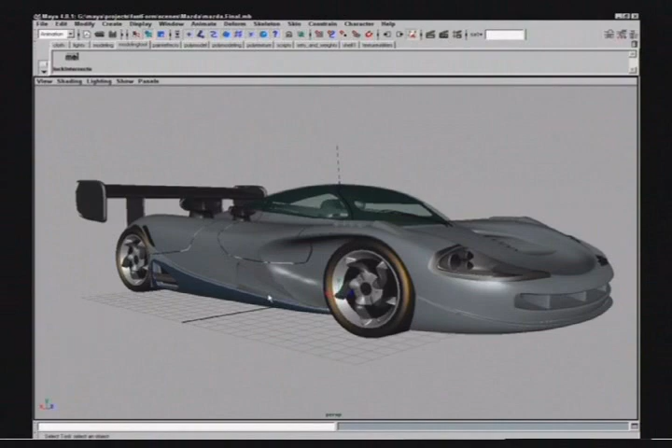In this modeling video, we're going to cover the steps to model this particular car, using a lot of things like bi-rails, freeform fillets, some lofting, a few of the circular fillet types, as well as some of the planar tools.

Building on what we've covered in the previous videos in the 1 and 2 section, we're moving a little further into adding more detail, dealing with more organic and refined shapes and surfaces, such as this hard shell surface on the car.

We're going to break down the different steps, taking each component in a separate section and talking about how each one was created, dealing with all the issues of trying to blend together different forms.

This includes getting the fillets that integrate second levels of detail, such as fenders, bumpers, and this little raised section, trimmed out areas, a lot of trim and duplicate, and even using a lot of the offset type tools, as well as extrude. So a little bit of everything.

The first thing we'll start with is building the main body form, which essentially uses the bi-rail tool, then mirrors one copy to the other side, and then deals with trimming out the various components to add on some of the secondary detail.

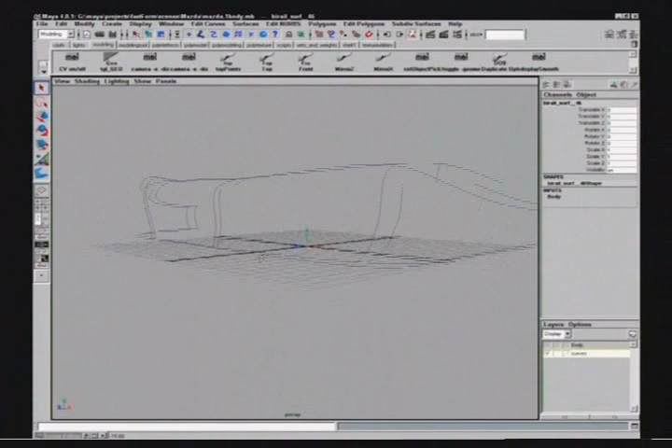We used the 3 plus version, meaning we have multiple cross-section curves being used to generate along these two rails. So this curve, the second, third, fourth, and even fifth curve are all part of your cross-section or construction curves, and then we have two rails, one at the top and one at the bottom. Bi-rail is kind of like a sweep or a loft, but it follows the two rails of control to keep the cross-sections together.

One thing you need to be aware of when using bi-rail is that curves always have to connect. Anytime I'm trying to create a rail, I need to have one curve touching onto the rail at both the top and bottom section. You always have to make sure that works, otherwise bi-rail will fail.

The first thing I'm going to do is set up how I would go about creating these curves, and then we can use this template of pre-built curves as a model to stage the next part, where we add the top section. I'm going to hide this for a second and talk about how I'd actually develop these curves. First I'd go into a top view and develop what I want the top profile to look like, or the elevation of what that curve shape would do from front to back.

So I'm going into my Create CV Curve Tool menu, making sure I'm on the 3-degree or cubic curve setting. I'm going to start drawing curves that basically go from the center line out and then back to the center line. For this, I want to use grid snap so I can get the first point sitting right on top of the grid, using this as my mirroring axis in the top view across the Z from top to bottom.

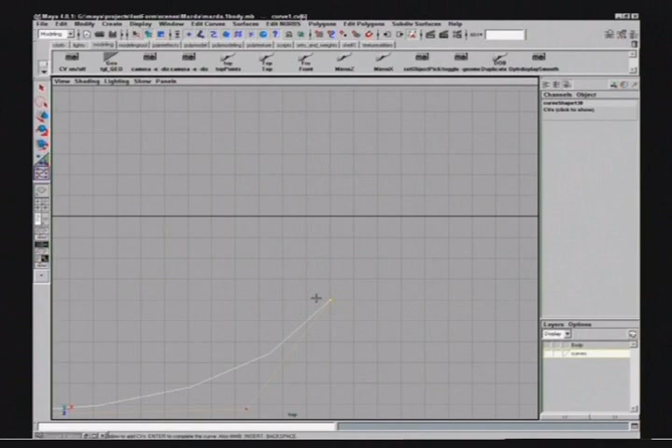When I get to the end here, I want to also use grid snap or some means to make sure those last 2 points are lined up. So I'm going to grid snap this one and put another one right there. Now I have those 2 last points, and then we can go in and shape the model a little bit, being aware that these last 2 points should stay in a row.

So if I want to pull a little more tension here, I'm going to pull this CV back a little bit, pull the one up here in the front a little bit more, and then we have 2 in the middle that can basically sit right there, kind of even along that horizon line. So in perspective, we have 1 curve.

Now when I'm talking about a bi-rail, we need to have at least 2 curves that exist as your rails. So in a very simple case, what I'm going to do is just duplicate this curve and move it up so that I just have a copy.

So I'm using as a hotkey just duplicate with transform, Shift D, and then I'm just moving up a single copy of it. So a quick copy, we don't have to worry about what our duplicate options in the above menu are set up with. Just copy it and move it. Now this can exist as our 2 rails.

The next thing we need is some kind of control curve that's going to go through here. Because bi-rail needs to have the CVs or points connected or snapped at least to those rails, what I'm going to do here is go into my Create Curve menu and select the EP curve, not the CV curve.

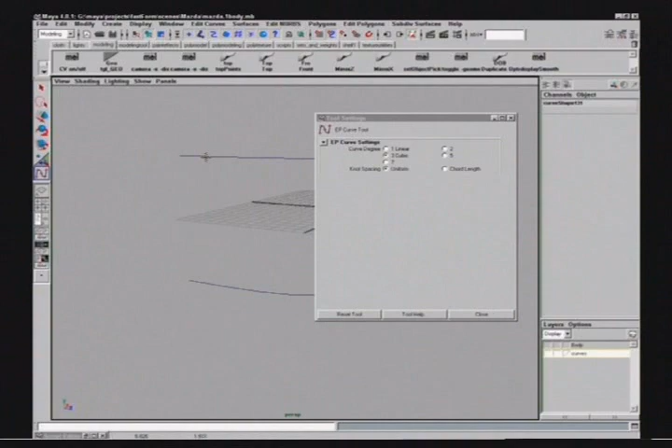So I'm going to use again the cubic or 3-degree curve for edit point curve drawing, but this time I'm just going to curve snap onto that rail at the top and then curve snap the second point right there on the bottom. This will create the entire curve.

Again, you don't need to have 4 points with the EP curve, and it's very easy to get things to snap right on there. So if I hit Y to repeat that last tool, and then curve snap onto the second set of rails, or basically on the back end here, and then hit enter to finalize it.

Okay, so what this gives me now is a complete closure, which will allow me to do one of the bi-rails, meaning I have 2 rails here, meaning bi-rail, and then I also have 2 cross-section lines, or basically curves, going between that surface.

So if we go up to our surface menu and come down to bi-rail, you'll see there's bi-rail 1, 2, and 3. What bi-rail 1 means is you always have 2 rails, but in this case you have 1 generation curve that you're going to sweep across there.

So for bi-rail 1, you need to have a minimum of 3 curves, meaning that I could use this as my cross-section, and then that as my rail, and that as my rail, and get a surface generated from this. I'm not utilizing the last curve right now.

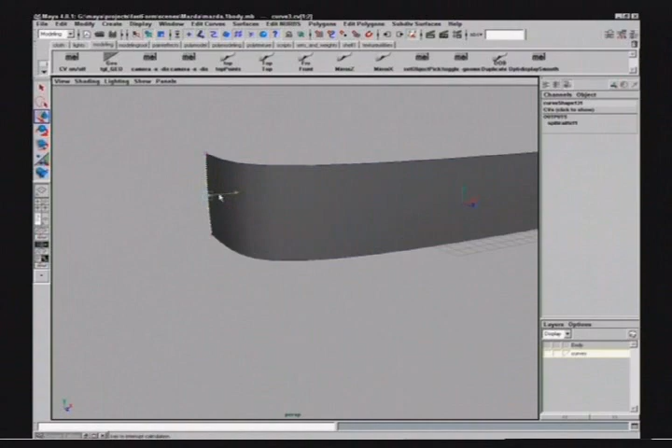With history, you can go in and change stuff as long as you keep the idea that those curves need to stay together. So let's move this one cross-section out a little bit, and you can see that sweeps that cross-section through those rails completely from front to back. Notice that this other curve, the back here, isn't being used right now, because this is just a bi-rail 1 generation curve.

Now also with history, you can go in and select the midsection. So if I want to push this part up or down and readjust how I want the profile to look, or the side view of that, pushing this rail up or moving it in, I can have that sweep still historically update through the various cross sections here.

Now this bi-rail 1 is just going to be limited by only having that one cross section curve. So if we remove the surface and try to get a bi-rail 2, that means I can take the second generation curve here and manipulate its control points. So we're going to pull these in this time, so I have an out concave to a convex situation right here.

And I'm going to go in and select the bi-rail 2 tool this time, which will allow us to again select and create a swept surface, but we need to have 4 curves total. So your 2 rails and your 2 cross-section curves.

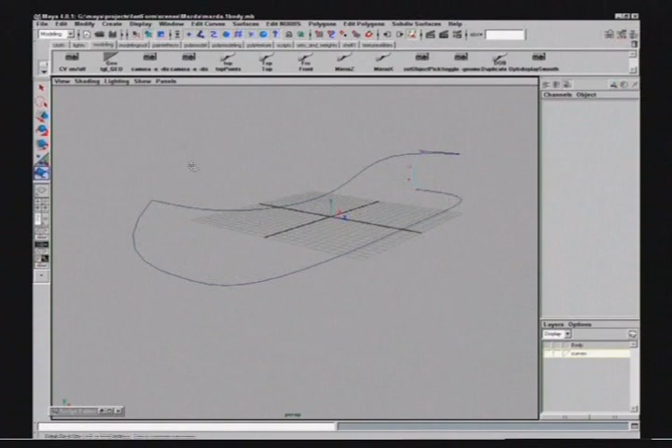Now when you're using this one, it's a little bit trickier as far as picking order really needs to be looked at. When you're using bi-rail, it is one of those command settings that is a tool, meaning usually you need to select the command first and then go out and pick the curves. In previous commands like loft, you may go and pick all your curves first and then say loft.

Here it gives us this separate pointer type, this little arrowhead, and if you read the prompt at the very bottom where the help line is, it says select 2 profile curves. So I'm going to select this as a profile and this as a profile, and now it says to select 2 rail curves. So this rail and then that rail, and again you're going to get your sweep through the bi-rail, this time looking at both curves.

Now if we flip this around, you can see that now it's utilizing the look of that one as well as the characteristics of that first one.

Now if we look at the attribute editor for bi-rail, it will show at the top the input curves - what is your profile 1 and 2, what is your rails, and then the transform mode, which says proportional, which you can also switch to non-proportional. Now the difference between proportional and non is how it's going to actually scale up or down your input profile curves, and how they're going to deal with changes in your rail distance.

So let's look at that for a second. If I take one of my rails here and start extending some of these CVs up, I'm creating a situation where it's much thinner here and much thicker over there. What is that bi-rail going to do at this point when it deals with the cross sections at the midsection of that body between the 2 rails?

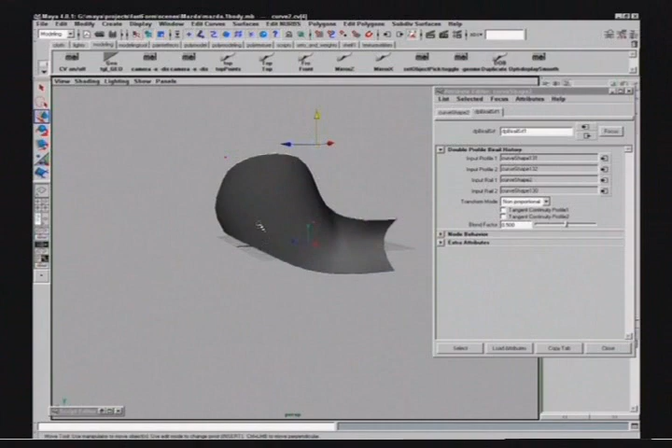Well, if we look at our bi-rail setting, non-proportional is going to scale that curve and actually kind of stretch it through this area so that it is scaling non-proportionally, or maybe more in the Y direction in this case, than it is scaling in the other 2 directions of the curve, or say the Z direction.

So when you flip this to proportional, you will get a slight change here, as it is still scaling that curve up, but it will just pop between a little bit more non-proportional linear scale this way versus trying to scale the entire curve and keep a little more of the curvature in here. Whereas normally if we took this curve and scaled it up, it would tend to look flatter as that arc got flatter over a distance of scale.

So that is one of the things that you can change in BiRail, and particularly in BiRail 2, that is going to be a valid transform mode change that you can make here.

The other thing you're going to see, especially in BiRail 2, is something called a blend factor. Blend factor allows you to modify which curve in your two-curve bi-rail, front and back, has the most influence. Right now it's at 0.5, meaning somewhere about in the middle of our rail, it's utilizing a kind of morph between the front and the back and getting something in between those two.

If this one is a little more convex and this is a little more concave, by the time you get to the middle, that profile is almost going to be a straight line. So you can influence the blend factor.

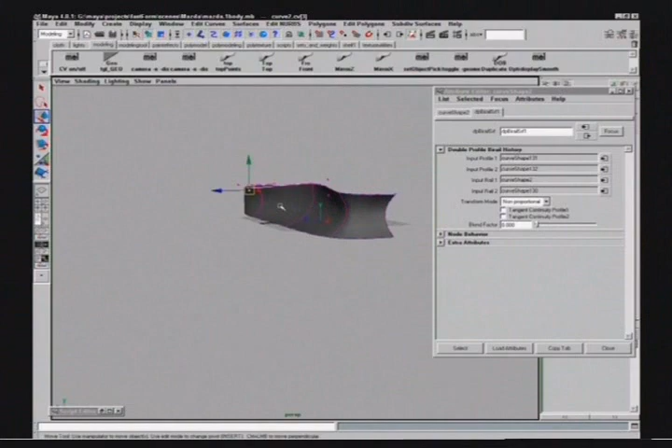You'll see that when I move this to 0, it's using essentially the first curve, which has most influence all the way through. So this stays a little more concave all the way through that profile as we look down here. If I move the blend the other way, then it starts to utilize that front curve, carrying this convex or pushing-out kind of profile further down the body. So even back down here, we can see that that is curving out more, and then eventually it's going to hit the way your curve looks at the end again.

So that is a BiRail 2 situation. Now, one of the things with BiRail 2 that makes it a little more unique is that you really have four curves, and any of those four curves can be your rails. Say these two could be the rails, and these two can be your profiles.

Because this is a sweeping type tool, you're either sweeping this curve, transforming through that curve along this rail, or it's taking this curve and transforming through here. So in effect, you can get two different results from BiRail depending on the order you pick.

So if we do the one we did last time, front and back, then rail and rail, it'll hit, and we just kind of move that to the side here. Then do BiRail again by hitting Y to repeat that tool, and we're going to take this as a profile, and that as a profile. This is our rail, and the back curve is our rail.

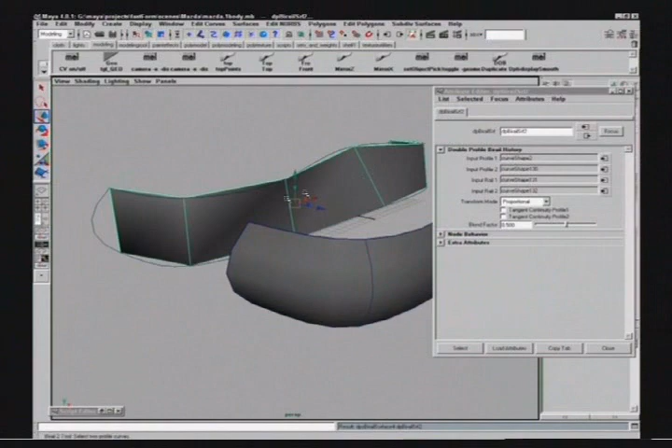With these two surfaces, there will be slight changes. If you push them over each other, you're going to see that they actually don't match up perfectly. There is a point where this is kind of popping through, and these are not exactly the same surfaces, because the sweeping operation will create differences depending on direction.

So this one looks like it's a lot flatter in its profile, and this one looks like it's a little bit better where it's curving and taking into consideration these shorter curves here. So that's typically the way I would do it—take the shorter curve and make that my generation curve.

Now, going back to BiRail 1, when we select this as, say, generation, path, and path, and we get our curve here, notice that you don't have the blend tool in your attribute editor—there's no blend slider. You can still use proportional and non-proportional, which will factor how that generation curve changes through the wider span between the rails, but you can't use the blend control between front and back.

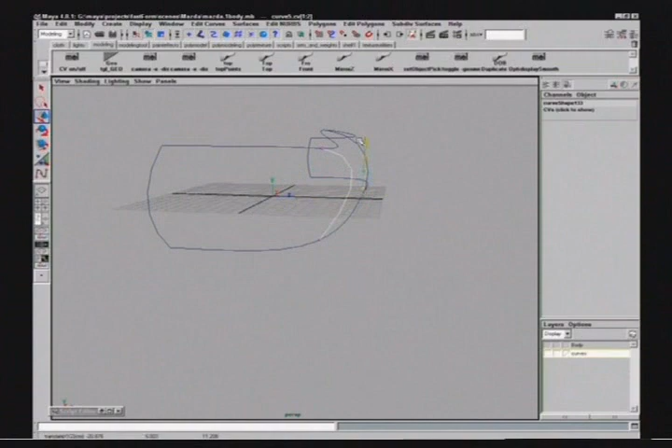Now the next thing is BiRail 3, which would be something where you go in and take multiple generation curves. So if I curve-snap another control in the middle of this, then hit Y to repeat the last command, and C to snap a point here and a point here, now we have the idea where we have more than two generation curves. We could take this one and move it out as well, and take this other rail section and also move it out and push it up.

Okay, so now I have more rails, basically four generation curves here. With this, if you go back into your BiRail tools, you'll see BiRail 3+. This, in terms of options, isn't going to give you blend control, and it will still use the proportional or non-proportional setup. But beyond that, you need to actually specify when you're done picking profiles, because it doesn't have a predetermined amount of profiles.

It's 3+, meaning 3 or more, and then infinitely as far as the number of cross-section curves that you could actually have there.

So what I'm going to do here is go in and start selecting my profiles, 1, 2, 3, and then 4. Then it needs to know when I'm done to start selecting the rails. So I hit enter, and then look for the prompt at the bottom that says select 2 rail curves. So I go 1 and 2, and then we'll get to our BiRail 3+.

Now in a tool like this, you have to watch out a little more, because it can give you more cross sections through the middle of it as it's trying to adapt to the changes in your rails. Depending on the severity between each one of these original construction curves, it can influence the number of points that rail is going to need to design the cross sections. Rails will also have to throw in a lot of extra isoparms to facilitate the weird breaks that happen in the middle of your surface.

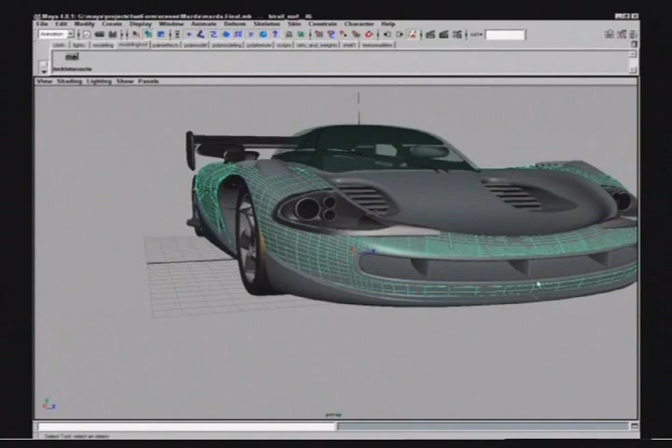So when I'm designing something like this cross-section in the model, I may start out just using a front curve and a back curve, and then do point pushing and pulling to get the rest of this body shape in here. Looking down, I might decide I need a more biased curvature up here, and then towards the bottom maybe this goes a little bit flatter. So depending on how you want to control it, BiRail 2 is a good one, or you can go all the way up and start generating multiple cross-section curves.

Now, for the sake of the model here, to get the same control of what I had in the last body that you just saw, I went and generated 5 BiRail curves. Each one of these is changing to adapt to the various cross sections that I need to have at that particular zone. So this has a much more raised and kind of flattened top section, and then curves down. This one right here is a little bit flatter on the side, and then that's a little more rounded, and so on.

And then this has a much larger back sweep into that section right there. So when I'm BiRailing something like this, I'm going to use the BiRail 3 for this particular one, and then we'll go through and make all the cross sections.

Now, another way you can work with BiRail is to do things in sections and then go in and attach them together, because BiRail does have some tangent history or tangent control between separate objects. So let's try that one as an example.

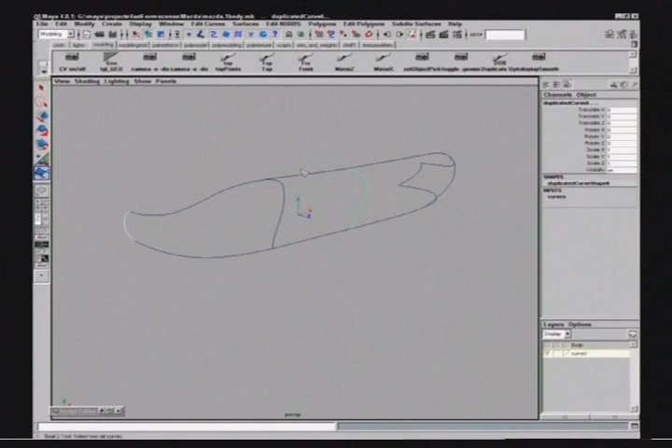We're going to go into a BiRail 2. First thing I'm going to do is select that cross section, and then let's just use this midsection, and go in and finalize this as the top. Even though this is a much larger or longer curve, it's going to stop right here, and then use the bottom section. So BiRail doesn't have to be an endpoint curve or stop right there.

You can use a partial BiRail, basically using a partial rail for that cross section. Okay, so I have this part developed. Notice that I maybe need to pull that out by pushing on CVs, or even do something like a BiRail 3 here. Now for the back half, we could do the same thing, where that'll be a cross section, and then up at the front, when I already have an existing surface, I want to go in here.

BiRail is going to automatically pick the isoparm of the existing surface and use that as its reference edge, not the curve that was there. So it's actually automatically picking the isoparm. And then we pick on that rail, and then the rail here, and then we get basically the completion of that other half.

Now this object is not going to be tangent or seamless yet. If you render it out or throw some shaders on here, you can see that the isoparms aren't lining up, and that they're kind of coming off at an angle here.

So one of the controls with BiRail, particularly BiRail 2, if you go to the attributes for it, you have 2 checkboxes called Tangent Continuity Profile 1 and Profile 2. So this can make the new surface, or basically the second surface, tangent to the first one.

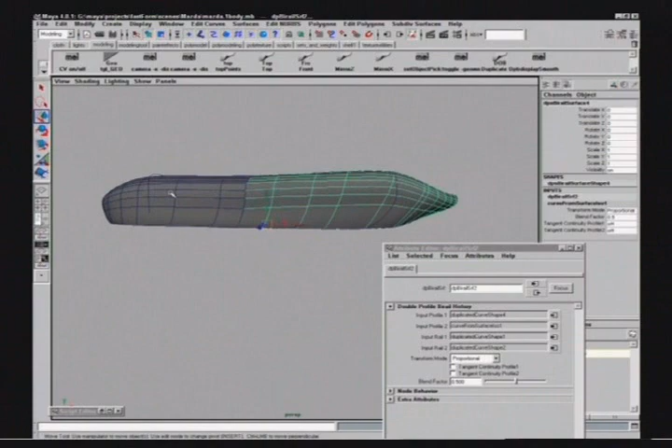Where it says Tangent Continuity Profile 1, if I click on that, I'm telling the first profile curve to be tangent to some other surface. But there isn't one here, so it's not going to do anything other than give you an error.

Whereas tangent on number 2, if we bring that up and click on tangent 2, it's going to go in and do a fine-tuned adjustment to this. If I click this off and then back on again, you'll see a real subtle change in the mesh. The closer these two surfaces are already, the less likely you'll notice a big tangent change here.

We may notice it a little more as I start adding some severity to the blend factor. But other than that, you're going to get the same kind of butting up of these two surfaces, and they're going to look similar.

Now, I may do this just to control sections, and I may not worry so much about the tangent continuity between these two halves, because as a third step, I'll go in and actually attach those two surfaces.

In that case, we grab something like an isoparm of that edge, right click, grab the isoparm of the other edge, marking that area, then go into Edit NURBS and say Attach Surface. We're using Attach with the blend method, and I may turn off knot insertion so it doesn't add extra points inside there. That will give you a definite smooth cross-section blending between this particular bi-rail.

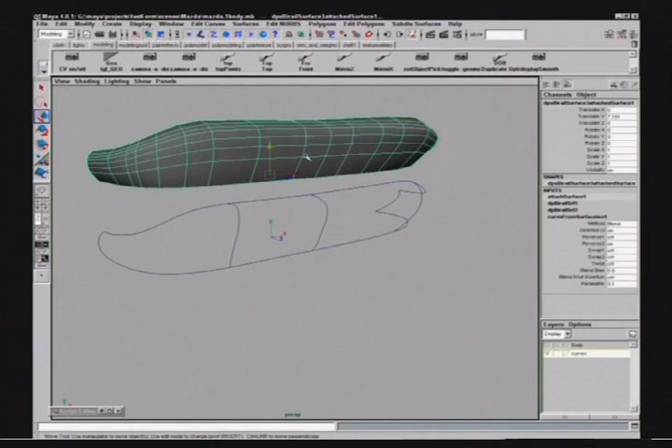So that can give us our cross-section. Now the next thing we want to look at, opening up another scene here, is once I have that section created—here I've gone in and fine-tuned it a little more, sometimes pushing and pulling on a few CVs to stretch and add tension where I want it, but essentially I'm just working off that original bi-rail.

Now I'm going to need to create this top section here, which on our other model is this piece, the top piece that is just blending between two halves, or the two copies here.

Now this is going to be a little bit of a cheat, but it does work to get the top to look fairly smooth or integrated between them. I'm going to do something similar to a loft, but it's actually going to be a freeform fillet that joins the two halves here.

So the first thing I'll need to do is mirror copy this to the other side. I'll make sure my pivot point is sitting over here at 0, which it is not, so let's turn on our grid, hit insert, snap my pivot back to center, hit insert again, then duplicate using the negative scale of Z. So X, Y, Z, go to that third column, third row where it says scale, make that a -1, then hit apply. This gives us a closed off surface.

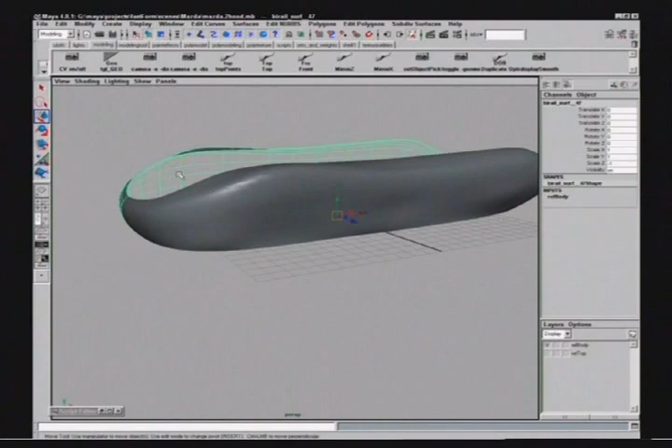One thing you'll notice in my display throughout here, something I changed earlier in my model, is I turned off double-sidedness in the renderer so I don't have to deal with the confusion of looking through the backside of the model. This also acts as a rendering optimization so when you are rendering your scene, it doesn't have to render both sides.

You can go into shading and turn on wireframe on shading to see both sides, but if you want to make it double-sided or single-sided for rendering, go to the attribute editor with that surface picked, come down to the area called render stats, and turn off double-sided. So right now this is rendering both sides; click it off, and it's only rendering one side.

If it's rendering the wrong side, you can hit opposite, which is right below that double-sided checkbox, or you can go in and actually flip the normal of the surface by going into Edit NURBS, Reverse Surface Direction. That'll flip that one back the other way.

So in either case, we have our two halves. Now what I'm going to do to close off the top and get a smooth blending is take the isoparm of this half and an isoparm of the other half right at the top, and go in and close them off. Now you do not want to use the loft in this case, because the loft is just going to give you a straight line, the shortest distance between these two edges. So you're not going to get a very clean surface there, as far as tangency goes.

Instead, I'm going to go into Edit NURBS, down to the Surface Fillet options, and there you'll see something called a Freeform Fillet. With the Freeform Fillet, this works kind of like the loft, but you can only use two curves. So to make this work, I'm going to grab an isoparm in that half, grab one from the other half, and then go to Edit NURBS, Surface Fillet, Freeform Fillet.

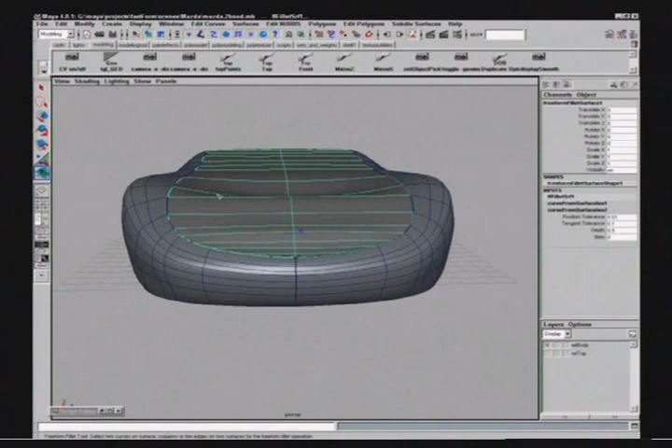That is going to generate a surface that goes in between here, but one of the things you'll notice is it starts dropping down and doing some other curvature changes in an attempt to keep this tangent from the top down. So this will actually check for tangency on both ends.

With Freeform Fillet, you're going to get a few extra isoparms in the middle here. In this case we have one in the middle, and if you right-click and turn on your hulls, you'll see you actually have 5 hulls across here - 1, 2, 3, 4, and 5. Whereas loft, you may end up with just 3 or 4. This mid one is just controlling how the lower dip-down section needs to look, whereas the 2 hulls on the end are trying to line up for tangency to the existing surface. So we do have a couple extra cross sections in here.

Now you can change a few things in this. For example, you can change the depth of the freeform fillet, and you can change its bias a little bit. So if you go to the depth slider and move it, going down to 0 will flatten it out - 0 gives you completely flat. Going up to 1, it starts curving down a little bit more. So what's happening at the bottom is this thing pulls down and tightens up. If we bring this back, it tries to keep those points a little bit closer together.

So what's happening in this case is that second row of hulls, which is controlling your tangency to the edge - by moving this, you're essentially moving these things in and out. I can move it closer to the edge where it stays tangent for a shorter distance, and then drop down. You can also change something called bias - it will switch which side is controlling more of that rail, and you can see the isoparm moving left and right. That's going to throw symmetry off on our model, so I'll keep the bias basically in the middle, at 0.

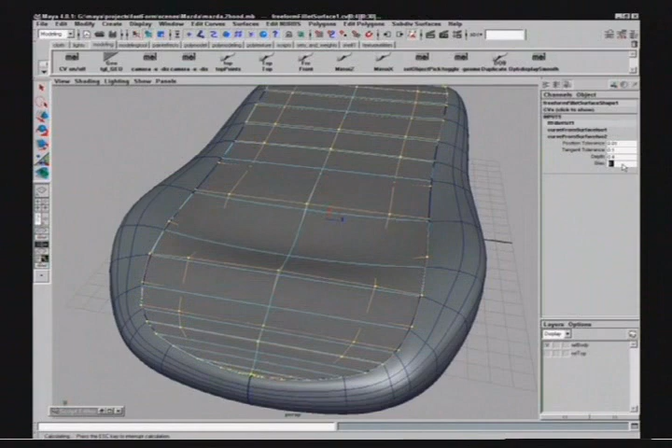But for my model, there's a lot more going on as far as how the tension is being built along the edges here - the way this is curving down a little bit sharper. So what I'm going to do for this is go in and add a few more control points in the middle of this surface. Let's hide the rest of the model temporarily, so go and hide unselected. I'm going to add a few more isoparms in here. Now for this, I don't want to just grab isoparms and drag them from here to here, because I don't know if I'll get them symmetrically inserted.

So instead, I'm going to grab the isoparm at the end of both halves - just highlighting those in yellow. Then go down to Edit NURBS, Insert Isoparm, and change the settings to Between Selection, so that between these 2 selected points we add 2 more rows of isoparms in the middle. If I apply, we get something like that. Or if I want more control, I can turn this up higher - use something like 4 rows of isoparms in between.

Okay, so that is just going to give us a little more control here, meaning that if you look at the hulls now, it's really forced the last 2 hulls on the end to be fairly far apart. And then these 2 hulls are really close to the edge, but there's a much more broader area in between here that you have control over.

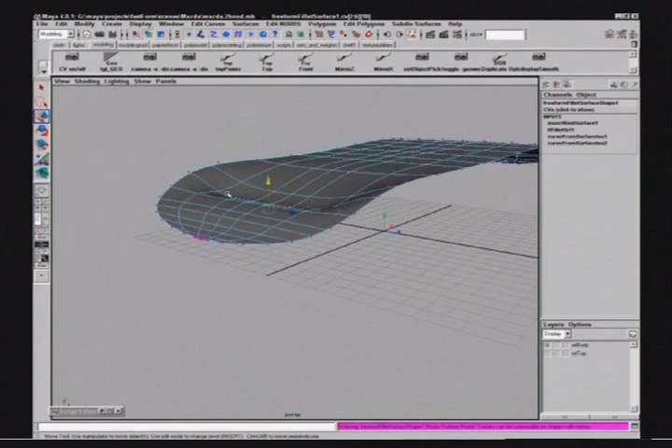Okay, and I'm being very careful not to pick the last 2 rows. So when you're looking at the model, the last 2 rows of CVs right along the edge, or basically those last 2 rows of hulls running along this edge as well, you don't want to alter those, because that's going to break tangency with the rest of the model here.

And you don't want to break the tangency right across this edge, otherwise you're going to notice a sharp seam there. So I'll start moving these down, and then using my arrow keys for pick walking, okay, find the right direction. I'm using up and down here.

You can then move down to, say, pull down that row, and pull down that one, and the one down here, and then continue until I get towards the end, and I'm not going to pull the last couple rows in the end to change the shape too much.

Okay, and then we can continue pulling these down. Say if this is going to recess a little bit, maybe you'll get to an area where this will cross, and that area will actually start to go higher, okay, towards the back. And if we look at the model, it is doing something similar to that, and then dipping back down again on the next section.

Okay, so this will be dropping, dropping, and still more until we get towards the end. So you want to spend some time kind of smoothing these things out, but in the end you're going to have a much smoother section towards the middle as we're kind of designing how that cross section is going to look.

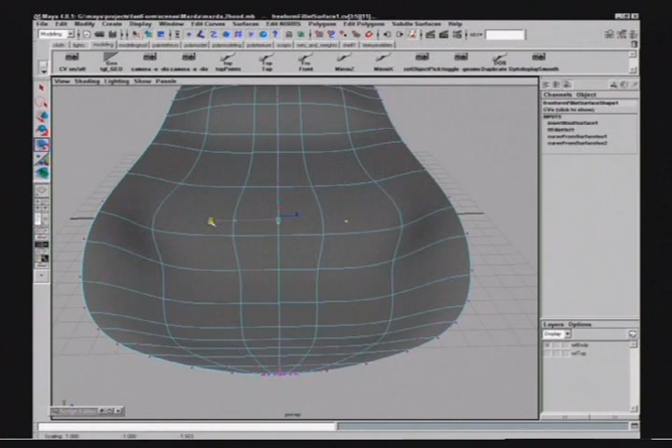And you can see that it's just going to build a little bit of a pocket of tension here. And using the arrow keys to jump to the next row, scale those out, and scale those out in Z, and then continue scaling these out.

So we're getting a much sharper kind of drop here, where that fender is basically going to jump over the top. So let's pull up the rest of that surface here. Let's see where I hid that puppy. Okay, just have to dig for it a little bit.

Okay, so I'm adding a little bit sharper kind of fender wall here with that type of tension. And then you can basically just continue to design how we want that front section to look.

What I did here is I have another reference object, so let's just hide that temporarily. And then this is the top that I ended up with. So this object here, let's just open up that layer.

Okay, so this is kind of what I ended up with. I pulled a lot more tension down right here on the corners, grabbing rows of CVs and pulling them down, and adding a little more width here where I want this hood section to start to V out and be a little less taper as it gets towards the corners.

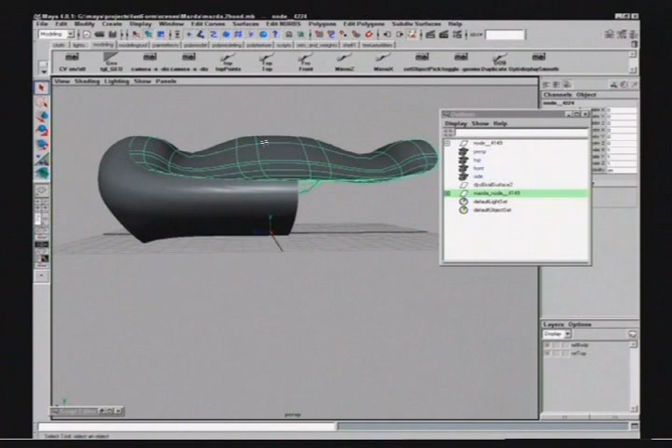You can see there's less control there, and then it starts to drop down. On the other side, we're doing the same thing, where this will drop down a little more severely and then have a bit of a hump back right here. So we get this little S transition going through right there, and another S transition going through right there.

This was just trying to keep in line with the type of shape or fluidity of form I want going through here—a little more definition in the fenders, a little smoother up here at the top. Okay, so now we have a section like that.

Now for our top piece, we want to get our little canopy area, which will be the section where the driver is going to be sitting. That's going to be a raised surface coming off the top of the other one. For this we're going to use basically an extrude tool, or we could use a bi-rail tool—either one can work for that case.

So I'm going to open up the next scene here where we have that set up for the canopy.

What I have now is the completed shape for these two forms, the two halves of the body side and the top section. And then I drew a couple of curves here that I want for my canopy. From a side view, just turn everything down to a level 1 display, and let's template these things temporarily so we can get them out of the way.

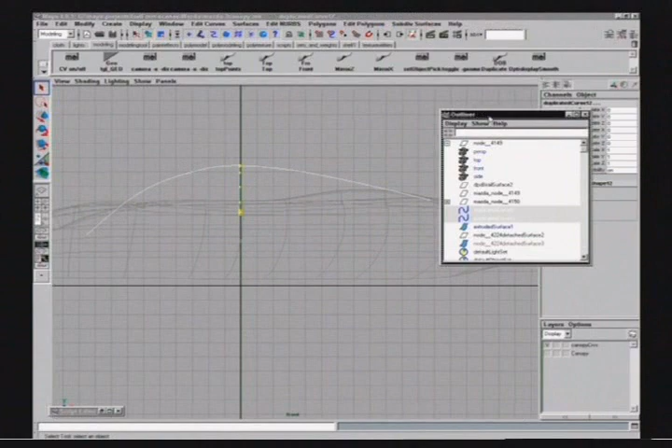Now what I do is draw what I want that canopy to look like from the side view. I go in with just a 3-degree curve and start laying in some points here, just to follow this kind of form—going into a fairly sharp raise at the front, a fairly long sloping acceleration, deceleration in the back.

I actually made this so where that little hump back of the other shape was, this is starting to become fairly close in line with that. So this is starting to follow right down where that edge is—it just dips below the surface just a little bit more.

So I have that piece, and then the cross-section piece right here, which is how I want the side view of that profile to look.

Now for this one, to make sure you keep it symmetrical—which isn't easy if you're just drawing this right across one side to the other—I will just go in and draw a CV curve. Snap the first point at the center, second point coming straight off here, and then throw in the points the way we want our curve to look. Then I would mirror this to the other side.

So we'd go into our duplicate tools again, or in this case I have a marking menu where I've set up some preset duplicates, fired off by a hotkey. So I'll just say mirror on the z-axis just to flip over the other piece, to make that go a little quicker.

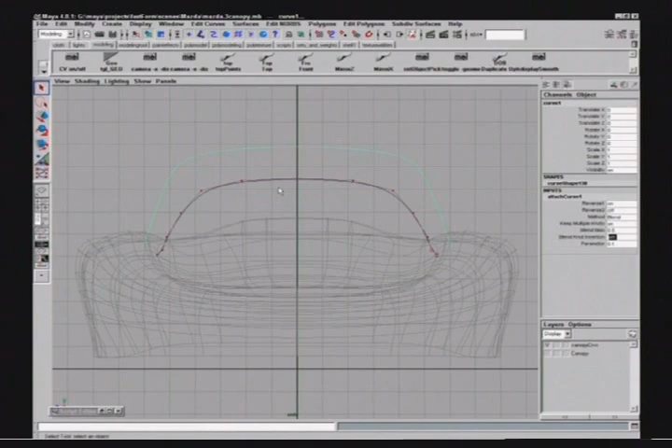Either way, that will give me my cross-section curve for this particular extrusion. So we'll turn off that one—I'm just going to use the one that I already have built here.

I'm going to take the generation curve, select that first, and then the path that I want it to follow, and then go into our surfaces extrude. We want to use the tube extrude, probably following the path curve, which we may change, and then use the component pivot—pretty much all the right options, right column of check boxes over here, and then go in and apply it.

Okay, and this will give us our cross section here. Now, I may not say that this is my final model.

What I'll do here is go in and turn back on the templated body section, and then make adjustments to my sweep surface to follow the type of form I'm trying to achieve, such that when we get towards the back, this may start to pull in a little bit more.

So I'll grab a few of the hulls, looking down from this top view, and scale them so they start to taper in a little bit, then jump to the next row with my arrow keys and taper that in a little bit more, and finally that last piece will taper in even more, so we end up with a more rounded intersection between those two forms.

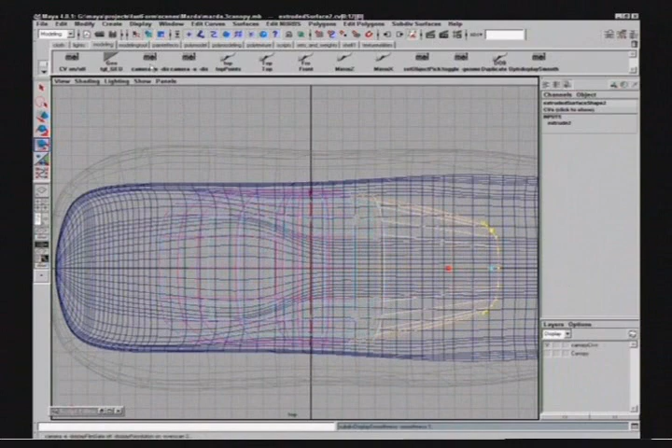Okay, so we can do a little bit more adjusting. Sometimes through the extrude you may get a bit of chatter or jitter in the side profile, so also look at this from the top view, and let's just hide the rest of the objects here.

Let's grab that and hide unselected, and turn on our hulls again to see what's going on in the middle of the surface as far as adjusting the hull so they don't move up and down too much. You may even want to make this easier to see by hiding the geometry—go into Display, Object Display, No Geometry, and maybe even turn off our grid and look closely at what's happening from one hull to the next.

So if it looks like this starts to come in too much, I may just slightly scale it out, then go to the next row and scale that one down a little bit to look for a more fluid line from one hull system to the next.

You may even have a few hulls in here that are either unnecessary for the shape, or spaced too close together. So you could either try deleting the hull, paying attention to what the surface may look like, or just come in and space them out a little more and maybe rotate them a bit, just to get a nice fluid form across there so everything looks clean in the end.

Okay, and you can see deleting that one hull I picked didn't do any justice here—it didn't seem to help the form very much.

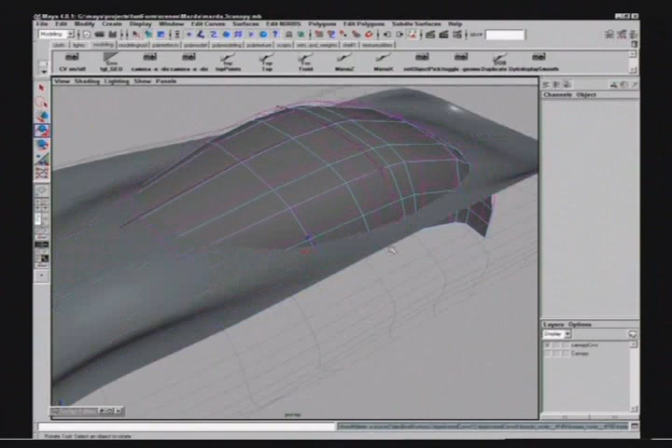Okay, so bring back the rest of the model. As far as the part that's really undercutting here or hanging below the surface, I'm not going to worry about that now. We can trim it later, or if we're not going to see this through the middle of the model, I'll just allow it to stand free, penetrating through the bottom part of that surface.

Okay, so we have our top section. Now the next thing we need to do is throw on some kind of fillet that will integrate between these two shapes. I want to get something that makes the canopy area and the body blend a bit more fluidly, say, through something like a circular fillet here.

Now when you're doing a circular fillet, we need to be aware again of normals. So I'll temporarily go into Display, NURBS Components, and turn on the normals in shaded mode. You can see those normals are now pointing to the inside of that shell. If I want a fillet that happens on the exterior of these two surfaces, I want the normals to be facing that way.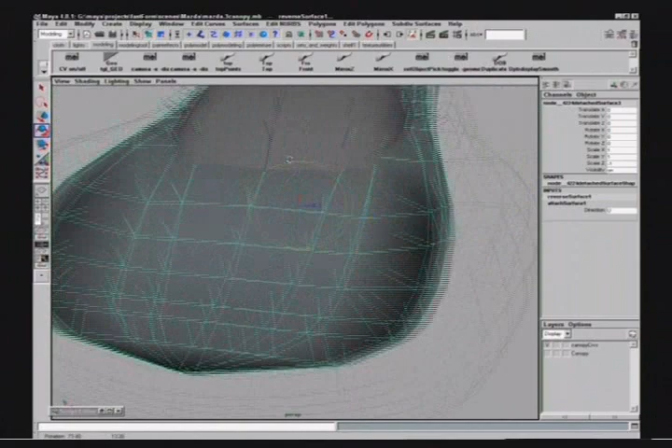So I'm going to set this up by reversing direction on that one, and then looking on this other surface, what is the normal display doing here - that's also on the inside. So I'll reverse direction on that one as well. Okay, so I have both of these little spikes pointing to the outside, meaning I'm going to get a fillet in this section. Otherwise, if it was reversed, we could get a fillet going on inside here, or maybe happening on the interior of that surface.

So if you do this first, it will make your fillets come out in a much more predictable way. We'll go back to display, NURBS components, turn off shaded mode. Then I need to decide what size fillet I need. If I use my grid as a reference, go to display, turn on grid, and figure out how much fillet I'm actually going to need in here - is it going to be like a half centimeter, quarter centimeter, something like that - so that we don't go too big and it ends up taking too long to calculate the fillet.

So I'm going to select both these surfaces, go into Edit NURBS, Surface Fillet, and then go down to Circular Fillet, go to the options here, and decide what kind of radius I want. Let's start out with something fairly conservative like 0.2. I'd rather go smaller than larger and then work my way up. So 0.2 kind of works with this.

We don't need to reverse primary and secondary normals, which decides which side the fillet is on, because we've already reversed the surface to make it look right. And then we want to turn on Create Curves on Surface, the checkbox at the top, so that later we can trim out the section by creating a curve on surface where that fillet joined between these two surfaces. So I could trim out the underside where it's kind of flashing down through the middle here.

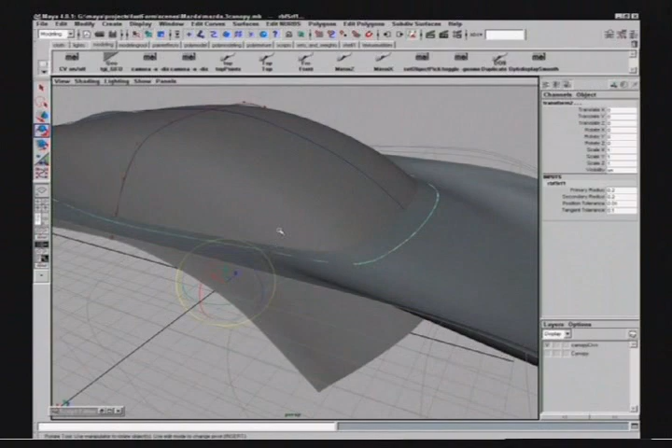Okay, now something happened here where it actually did put the fillet on the wrong side. So it didn't really pay attention to my normals after flipping them. It could be a symptom of a history-based problem - reversing with history still on kind of remembers the old surface, and even though we reverse the normals, it thinks it's on this side still. So that kind of blew that idea of trying to pre-predict it.

So the next thing I need to do is figure out I need to flip the fillet. Well, it is still happening on the outside of this canopy shell because the fillet is not on the inside, but it is happening on the wrong side, or the lower side, of this surface. So what I'm going to do is look at this surface in my fillet, which is called node something 442, detached surface, up in the channel box.

And if I go to the attribute editor for that fillet we created - okay, which is the RBF surface node - up here it lists the primary and secondary surfaces. So I need to know which one was secondary, or which one was this surface, so I can flip the fillet by giving it a negative radius value.

So if the secondary surface listed here is this one that's highlighted, then I will give the radius a negative value here. So I'm going to type in negative 0.2. This will cause the fillet to flip to the other side by basically inversing it on this section of the surface. Now when it reversed it, the fillet ended up being really small - okay, tiny little fillet going on right here.

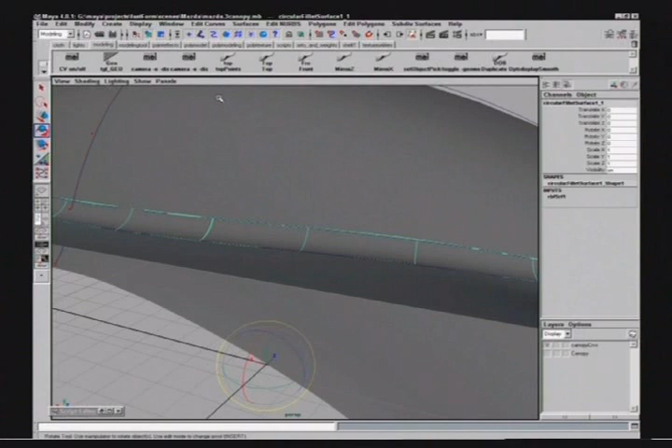So I can gradually step this up by changing the size of the fillet - maybe give this one 0.3 or 0.4, and then give the other one a negative 0.3 or 0.4 value. Sometimes you'll get failing if they're both not kind of consistently the same size - it just depends on what you can get away with. Okay, and that will build my fillet, going through the surface from right here to right there. And we will see that if we turned on curve on surface, there should be a trim curve sitting on here as well.

Okay, if we go to shaded mode level 1 and look at our fillet, which is what got generated, and then right next to that will be a curve on surface. This curve is actually part of the surface, and you can see I'm moving it around the surface right here.

But this is a point where we can go in and trim out our surface. So if we go back to shaded mode, I can trim out based on that fillet that was created, using these curves on surface to trim it back. So we go into Edit NURBS, Trim Surface or Trim Tool, and this will highlight the area where that actual trim curve is.

Then we need to decide, do I want to keep up here or keep down here? In this case, we want to keep the upper canopy, so I'm just going to mark one part on here by clicking with the mouse. You can click all over if you want, just as long as you stay on that top side. That will open up and get rid of that lower section.

Then this piece we can also trim by going back into the Trim Tool, and it will have another curve on surface that was generated based on where that fillet ended up on the second half. So we can get that into more of a hollow shell. Looking inside there, that's been basically scooped out, kind of like a Boolean operation, but now we have a fillet that is a transition between those two surfaces.

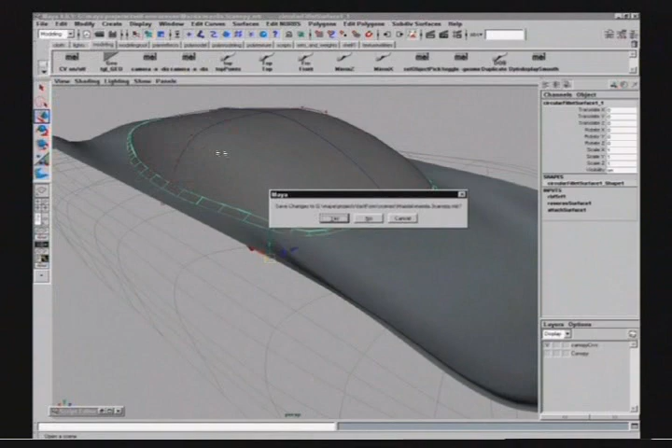On my model, what I have here is a canopy with that fillet already created. I select it right here—you'll see there is the fillet section. Actually, that one doesn't have it, let's open up the other one. Okay, it looks like my fillet is actually invisible. Okay, so we did already create it, let's go back to another scene here where we do have our fillet.

What we're going to see next is where that fillet was actually joined together in the model, and this is all trimmed out here. I made this fillet just a little bit bigger by keeping the side of the canopy in a little bit more, and then we trimmed it out, so that's the fillet running across the surface, getting a little bit larger. This is a radius of actually 1.0 that was able to fit in between these two surfaces.

Then I threw on just a window shader, which we can change, but basically it's just a smoked transparent glass surface, and then we have our fillet joining between all those shapes here. That'll create a smoother transition between them.

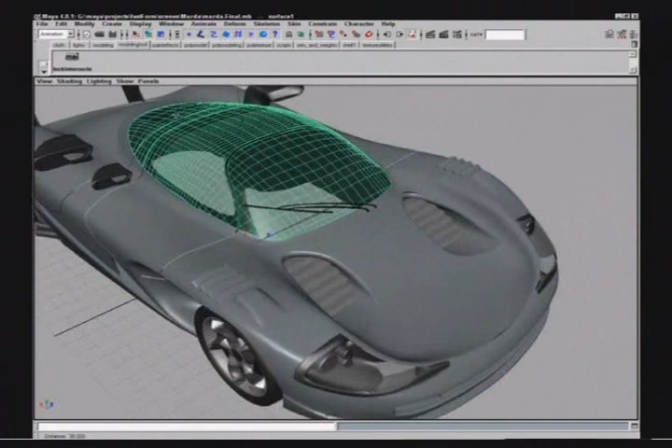Now, looking back on the model, the next thing I'm going to address is the idea of putting in these little air intakes. These are also using fillets, by intersecting with this other form here, which essentially is just a cylindrical section of tube that's being intersected into the main part of that body.

So we come back down to here. The way I set this up is I have two curves. Let's go down to a lighter shaded mode. I have two curves here that I drew from circles—so we have a circle here and a circle here. They've been duplicated and just offset or moved back from the other one.

And the circle, when I was generating it, I just kind of flattened out an existing create primitive NURB circle, brought this up in the active view, and just by grabbing some CVs here and going in and scaling this out non-proportionally, pulling down these, scaling it down a little bit flatter, pulling the ends in by scaling both ends, we kind of square off that little air intake. So it's just grabbing CVs on both corners or both edges, side sections, and then going in and scaling it down.

Okay, so I put that into position so that between here we can generate a surface just from here to here by doing a loft. Then I want to see how this is positioned in between my model.

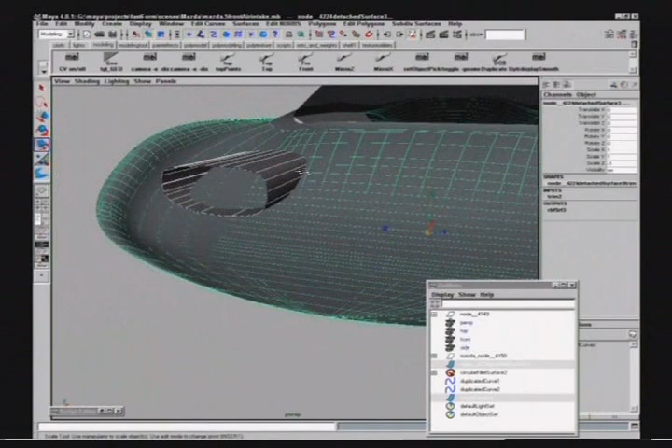So I want to make sure that this is completely intersecting that part of the surface, and then having a place where I can actually go in and generate some kind of fillet in here, which will be a trimmed out transition between the front and the back surface.

So if I don't know what my surface normals are, we can also try to guess. I'm going to pick that surface and then that one, and then go in here with my fillet tool and set up again just like we did for the canopy. So I'll go into circular fillet.

I'm not sure what side I need to set up or what kind of radius, so I'm going to start out with a fairly small radius, maybe like 0.1, and then go in and apply that over the surface, and it may again put it in the wrong area.

So we need to look at exactly where is that fillet going to stand right now. So it looks like it's happening on the inside of that surface, which is good because we want it to kind of go cup underneath here, but it is also happening on the wrong side of this surface. So it is happening right on the top side of this. I actually want it to happen right there on the bottom side.

So we'll have the same issue where we need to flip that secondary surface or whatever fillet that we had created here. So I'm going to go into my fillet input and change the secondary surface to negative 0.1. And then we'll wait for that one to update. And now we have a fillet that is starting to cut back underneath here.

And it is also happening right there on the inside of that other section. So let's just dig down and find our little fillet here, and see how that is being created, where it is basically starting to cut back a little bit of roundedness through that other part of the surface, and we may need to get this to actually reverse on the other half. So we want the fillet to kind of come down this way.

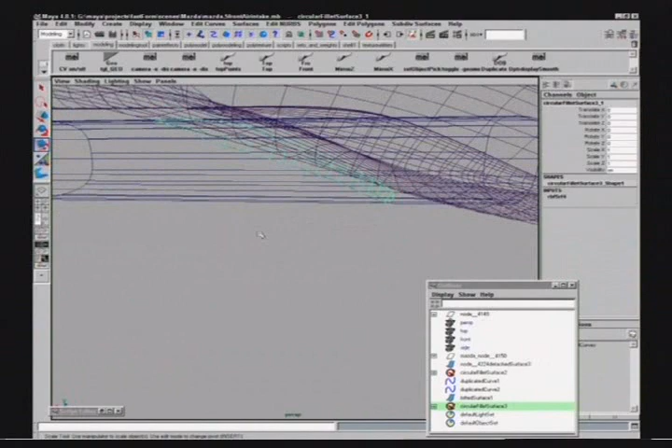So you may need to flip both of these surfaces now. So I'm going to grab that one, and in my fillet tools also make this a negative 0.1. So we'll have that fillet, instead of gravitating towards the front, goes towards the back, and now we have kind of the proper little air intake.

When we go in and trim this out, see what that thing's going to look like. So I'll go into the trim tool, again picking on this surface. We want to keep the interior part of that air intake, so I'm going to move down inside here and select that just to eliminate the back section. So we have this wedge, and then the front part is eliminated.

And then for this other section, I'll hit Y to repeat last command, and also trim it out, keeping outside of this hole. And that will give us this kind of air intake with a little bit of fillet radius that just kind of curves down below that surface, and then connects on to this one right here. And we'll hit 3 so you can see you got that little kind of U fillet happening right there.

Alright, and then that would be repeated, basically duplicate these curves for the other half to get both of them put in together, so that we can create our air intake. Now for the lower section, once we have this part done, we can start adding other types of detail.

So for example here, load up this model, we have a lower air intake that will happen kind of at the bumper level. So it's going to be happening down below the rest of that surface. So what I'm going to be looking at is this section right here.

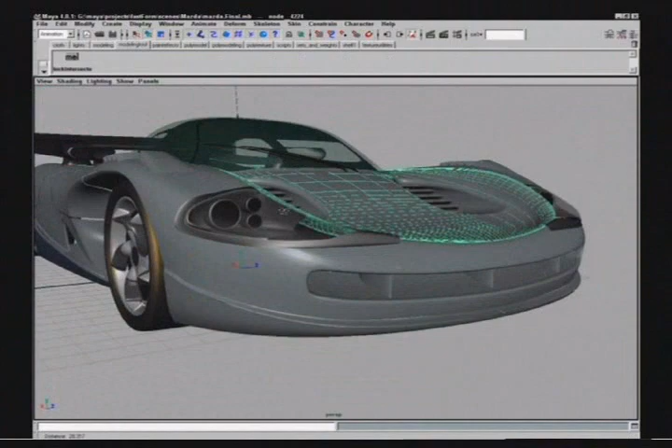Where this is another kind of filleted out section taken from the lower half of the body, and also doing a circular fillet that is intersecting within this other kind of wedge section down at the base here. For this one, we can also look at dealing with both halves of our model, where I may not want to do this to both sections.

So I can take half of this and just delete it for now, generate the fillet on this half, and then just mirror everything back over to the other side.

So if I look at this from a side view, what I had generated here is just one curve that I'm going to project onto the side of the body. This is happening right here at the front, and that curve is going to give me a curve on surface right there where we can go in and trim out a section, or actually create some kind of intersection between those two halves.

So I'm going to grab this curve. Again, this is just a U curve. We start outside the body, come back around, and then back outside of the body again. So I'll grab the surface and the curve, and I'm going to place this on the surface by going into Edit NURBS and Project Curve on Surface.

Now we want to make sure when we project the curve on surface that we have active view on, so we're projecting from this orthographic view. Everything else should be set up fine, so we'll just apply that, and that will lay down a curve on surface, just like you see here. From that side view, that U curve kind of extends all the way across this bumper section.

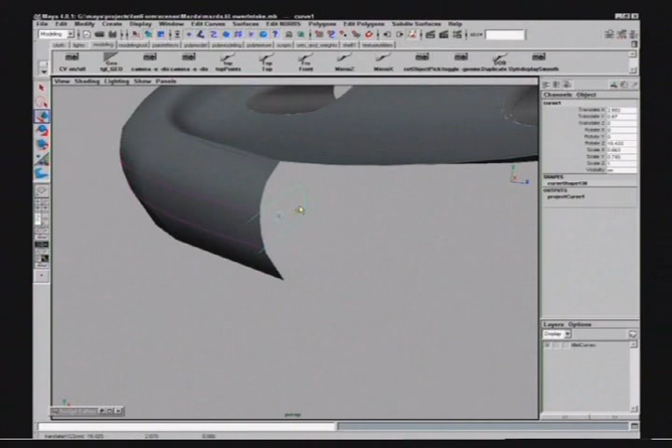Now you can move this curve around using history. If I just center the pivot right here and go into translate, this curve can be moved forward and back, or grab on points just to decide how you want that to look. So if you want a smaller opening or a much wider opening, you just extend that curve by moving it forward and back in the X direction, just till you get that section to look to the size you want here. So we have that curve.

Now I can trim this out through the projection by going to Edit NURBS, Trim Tool, and here we're going to trim out this piece, keeping basically everything else in the body minus this little hole opening here. So that'll give me my trim section.

Now this is going to use something similar to the way I did this fillet, but I'm going to do a little bit different thing, where instead of getting this kind of cylindrical opening and starting with that and intersecting it with a circular fillet like we did here, I'm going to go in and make my own kind of surface from the existing trimmed out hole section.

So with this, we're going to right click on our surface, select the trim edge, which is the edge that has been generated by the trimming out of that hole, or trimming out of where we projected that curve on surface. And then I'm going to extract or duplicate that curve off here by going into Edit Curves and saying Duplicate Surface Curve. This basically just clones that trim edge, and then we can pull this back.

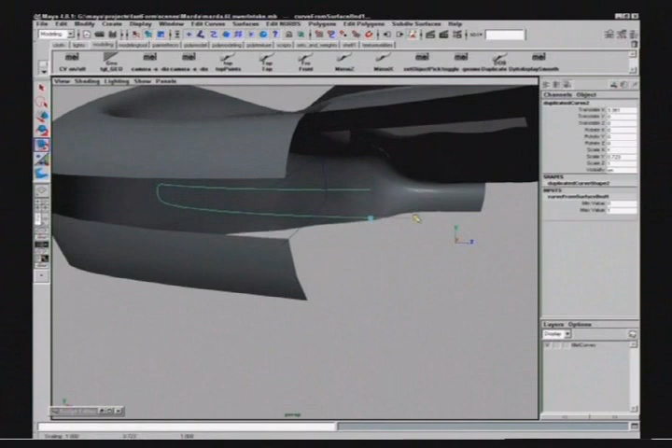That will give me a duplicate copy of that trim edge, just slightly pulled back here, and I may need to scale it up a little bit if I want to make this whole opening a little bit different size. So we can go in here and scale it down just a little bit, and if we want to scale it to the interior or make it a little bit smaller, hit Insert and throw the pivot point right on the end of that curve, just like that, and then I'm going to scale this in a little bit to the side, making this a smaller version of that existing trim curve.

Now I'm going to take the same one again and duplicate it by right-clicking Trim Edge, again extracting a duplicate surface curve. We're going to pull this one back as well, but not quite as far, and then also throw our pivot point right on the edge here, curve snap it, and then scale this one down as well, making it a little bit smaller, a little bit more to the interior.

Now this can be my generation curve between here and here to do a loft. So I'll build just like a real basic kind of tunnel or hole opening from that one, and then we can create a surface fillet off of here. I'm just going to reposition this a little bit. Maybe go into a side view so we can see what's happening here, and let's just pull this up a little bit, maybe pull it forward a little bit. Then I'm going to take that back curve that I created with history and be able to pull this up.

Maybe if we want to get the same angle or have this thing flatten out here, all we're doing is controlling how we want this interior opening to look, but I'm leaving a gap between here and its edge.

And then we can build a fillet through this by leaving a gap, this time using the freeform fillet. I'll go down to Surface Fillet, Freeform Fillet, and generate it off here by picking the trim edge of that surface and the isoparm of our loft surface. So we have these two curves highlighted. Go down to surface fillet and say freeform fillet.

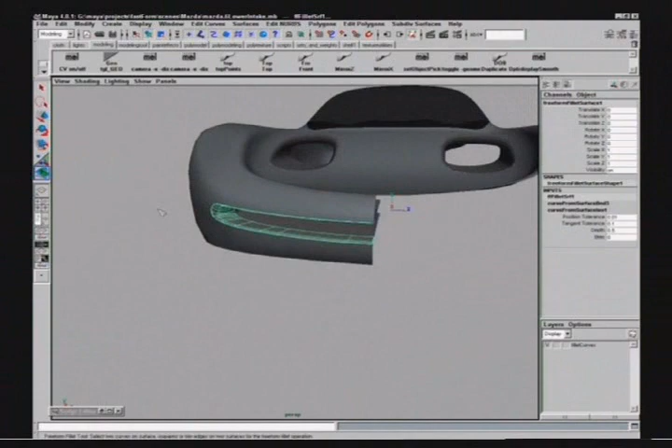Okay, this will close off that section here, giving us a nice little radius gap in between, and then we can adjust how we want this to look by changing the scale of it. So if we're getting a little bit of pinching here, I can hit insert, set my pivot for this object right on the center line edge again, so we don't want to mess up our center line.

And then go in and deal with scaling issues. So if I want to scale this out a little bit or bring it a little bit closer, maybe scale it a little more forward, scale a little bit forward in X as well. So all that can be just kind of fine-tune adjustment of where we want that fillet to stand.

Now, if you don't like this method, you could do the same thing you did for the other one, which was going in and scaling, creating our hole opening and doing the fillet intersection. So that's just an alternative means to create this interior piece. Sometimes you may get a little wrinkling if the fillet curve is too severe, where the circular fillet could give you a better result at times.

All right, now we've got the front opening done, our lower intake is done. And then we need to address putting in things like wheel wells. If you look at this model, we have a wheel opening or wheel arch that is a little bit different - this is a more organic, interior blended wheel well.

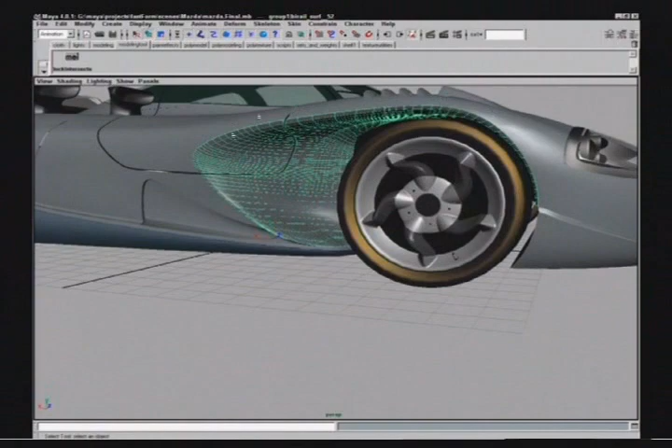For this one, we're going to use a little more specialty setup, meaning I have two curves that I'm trying to go between, and some kind of path that follows around here. That could actually work for the idea of something like a bi-rail, but I'm going to get more detailed in how I set up these cross sections from the side here, and then the one in the front, right around the opening of the wheel well.

So the back one is pretty easy - that's just a straight-on circular cut-out opening that we're going to achieve through this one. So let's go back into our other scene.

And what I generated here is two separate curves. One is where I want the interior of that wheel well to end up - this is sitting right inside where our wheel base is, just slightly to the interior of that tire. And then this other curve I'm going to project onto our surface, which is going to be laying across here, the much larger arched out opening that we have.

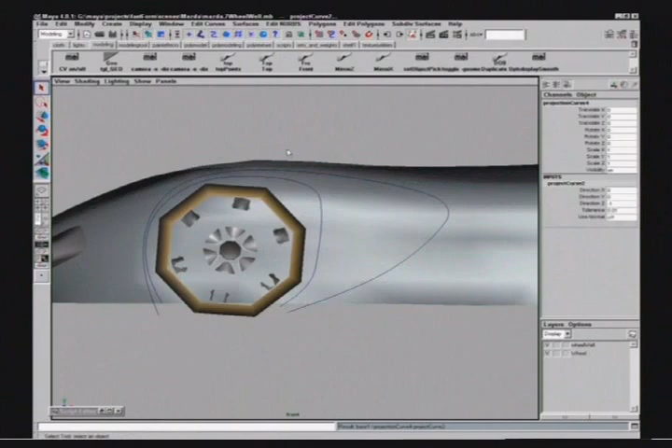So I'll select this curve that I drew, just a basic CV curve, and that surface. We'll go into our side view, and you can see how that curve is sitting right here and how I want my wheel opening to look. And then we'll project this as a curve on surface - edit NURBS, project curve on surface. Now this will give us our actual curve here that we can use for trimming out this section of the model.

So I'm going to trim this out now, going into edit trim tool, pick on here, trim it, keeping everything outside of that wheel opening. And we have a much larger section removed here.

And then I have another curve, like I said, right here, which is where I basically need to have some kind of closure going from here to here. Something that if we just did a straight-on loft between trim edge and that interior curve, this will give you a visual of what that surface would need to look like.

But the loft is clearly not going to give us a nice smooth transition. It's just going to leave a very hard edge here. We could always throw in some kind of circular fillet to do a transition, but that's not the way I'm going to do it this time.

Okay, so let's hide our wheel. And this curve we're not going to use right now, so I'll hide that. We're basically going to work between these two curves. Now I'm going to set up a special kind of arrangement where I'm going to bridge the gap here using the curve on the trim edge, similar to the way we did a bi-rail as far as the initial setup.

So I'll go into create edit point tool. Create edit point curve right there. And we're going to curve snap onto the end of that interior wall curve that we created, then hit C and curve snap onto that trim edge. Okay, so we bridge that section there.

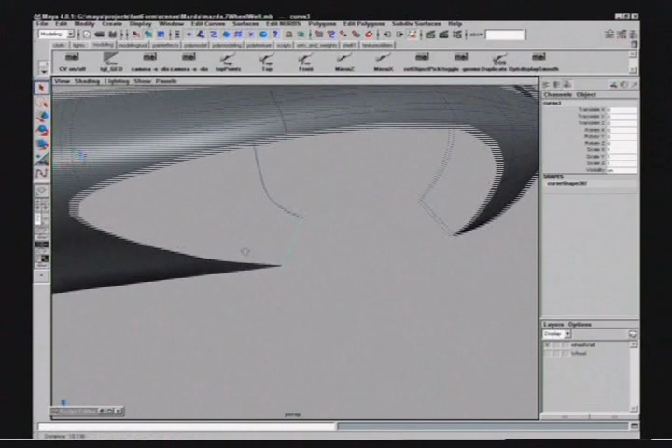And then I'm going to make another curve, hit Y to repeat last tool, C curve snap there, C curve snap right there. Okay, now I have a closure. So this could work with bi-rail, but again, our construction or generation curve isn't built that well, so that's not going to make it look very good yet.

So I need to make this thing look smoother, like a nice smooth tangent transition coming off from this surface to that one. So for this, I'm going to take this curve and that surface. These both are selected, and we're going to use a new tool under Edit Curves called Project Tangent. Now what Project Tangent does is makes a curve tangent to a surface.

Essentially what happens here, if I turn on the CVs and look at this in a smoother display mode, it's altering or manipulating that second CV of the curve to make it tangent to our surface. Right now the way it's trying to be tangent is to the surface that's running more vertical here. This happens to be, if we look at our Project Tangent, the tangent direction, which is right now set up to U.

If I alter this or change it to be tangent in the V direction, okay, like that, now it's trying to make that second point tangent coming off the surface and then heading off into our model. So we want to make sure we get the right direction of rotation. This second point isn't really doing anything, so I can just manually manipulate that and maybe pull this out a little bit and design how I want that integration, this little kind of J hook into that surface.

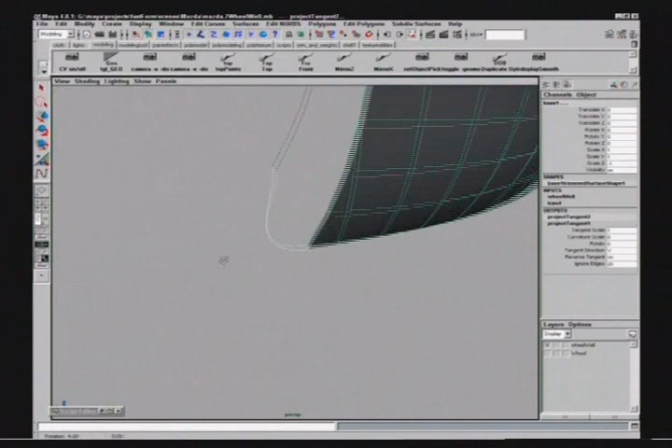I may also want to make this tangency a little bit smaller. So you have a slider here called Tangent Scale also in the channel box. By moving this, you can scale how far that second point is away from the surface. By actually scaling it negative, it's doing the same thing as the reverse tangent, so it's kind of a redundant tool there. So we can move that back so it's a little bit tighter.

Maybe see how this works with my wheel well. Is it going to be penetrating it? Okay, so turn that off. And then manipulate the second CV here. Okay, and then say we're going to pull that out a little. So what I'm creating then is a nice smooth integration between the curve on surface and the curve off surface.

Okay, so this curve on surface, our trim edge, nice integration between here using Project Tangent, and then our final surface over here. And then we need to use a tool that will allow us to fit this in. Well, we could use bi-rail, or we can use something called square. Either one will get you a surface.

Square is a little bit better because it's going to make sure we have tangency along this edge, since we can specify that. So we'll do a little introduction on square. If I go into the square tool, which is under surfaces, and go to the options, we want to make sure continuity type is set to tangent, and have everything else set up using the defaults.

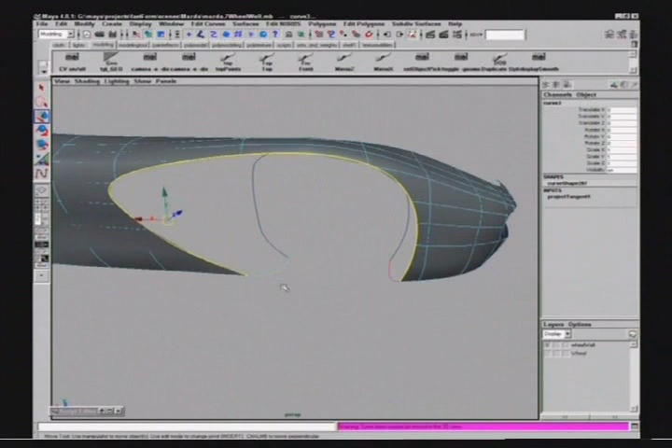So this should all be okay, the default setting right there. When I build something with square, I'm going to go in and pick on the necessary edges that I need. I need this trim edge, and then pick clockwise or counterclockwise. Unlike bi-rail where you do a cross and generation to rail, I want to pick one curve, then shift select the curve that's touching it, and then the next one touching it, and then the complete closure of all four curves there. So we'll pick them clockwise around, and then go in and say square.

Now square will give me that surface with fairly light point load. Square builds a lot less points than bi-rail, and if we hit T or show manipulator right now—I'll lower the res on all of our surfaces, just select all and go down to level 1.

And then I'm going to pick on that surface again, click on the square input here, and then we'll turn off our shaded display. What you can see is there's some markers going on here. One of them says tangent, and the other three say fixed.

Now the one that's tangent is able to be tangent because square is referencing off an existing surface. On these other three curves that I built, coming around here, none of those were touching another surface, so there's no way of getting it tangent.

Also, the only way you can get this edge tangent here is by making sure the curve that's coming off that edge, which was our main body of surface here—so this curve coming off the main body, and this curve coming off the main body, needed to be tangent. That's why we use the project tangent tool to make sure we have a nice tangency coming off that side. So click on square, and we can see we have tangency.

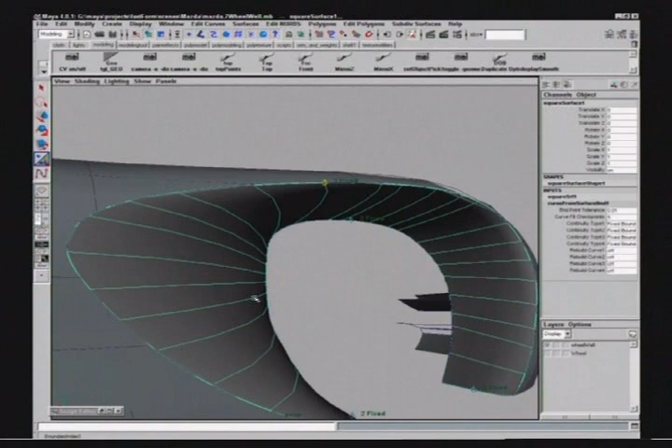This means that when we look at this smoothly, it should have a nice smooth tangent transition here. If you wanted to change that, you could click on that little tangent arrow, that blue arrow, and turn it to fixed, and now you're not going to have a nice tangent surface anymore. It's just making sure it's fixed down to that edge, but not necessarily smoothly integrated. So when you click on fixed, you're going to see a slight bump or slight change in that surface.

You can also go in and see that this is side number 1 here. It says 1 tangent, and then we can come in the channel box and say, let's change 1 to fixed, or come back and change it to tangent. That'll make a nice clean surface.

You can also clean up that trim edge, because we have a lot of isoparms going on here, by rebuilding the curve, which was really the trim curve used for that edge. So where it says 1 or tangent, if you come down in the square options where it says rebuild curve for number 1, you could turn that on as well, and that can sometimes reduce data—sometimes it'll even put in more data. You could even take it so far as trying to rebuild all of these, but typically I would rebuild just the trim edge. This can make things cleaner or sometimes heavier depending on how you have it set up.

So that's a way that we can do that little fender integration. As far as the back wheel and this wheel well, we'll address it the same way. If I have my wheel copy here, I'll duplicate that and move it back and decide where I want to have my wheel, and then I'm just going to do a straight-on draw curve and project it on.

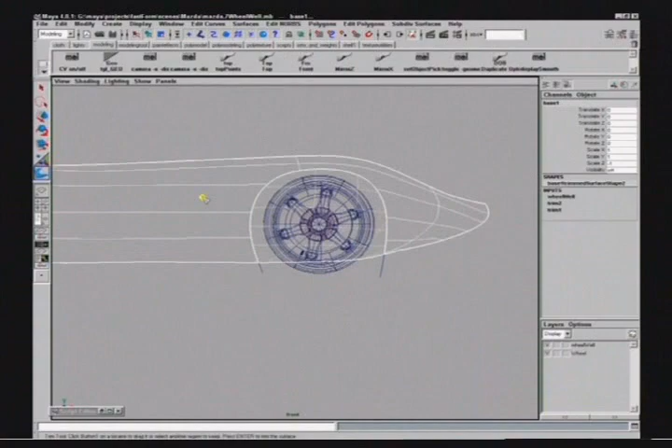Just basically come in here and draw a curve, draw a curve off surface like that, pick my surface so both these are selected, and then go in and project curve on surface, and then come back here and trim it out, keeping that whole section moved out of there. So we'd get something like this.

Now we need to address some other details. Okay, if we come back in the model, I added some other things like this little lower rocker kind of bumper scooped out area here that has another fillet.

Namely a freeform fillet that is doing the transition between these two halves. So we have that surface going to that one through that little fillet here. And then we also have some other areas where we have that same kind of transition going from the body side here through a fillet.

And then onto the rest of the surface there. In both cases, this one as well as this one, I'm generating the surface by doing a little bit of an offset. So I'm really cloning the existing surface and then turning it into another trim section that will be a little bit wider.

Okay, so let's just hide this and take that curve. First thing I'm going to do is generate a curve on surface where I want that bumper integration to happen. So I'm going to be projecting a curve by going into create CV curve and just draw a curve that kind of descends down towards the lower bumper area, which I'll select both of these and project curve on surface.

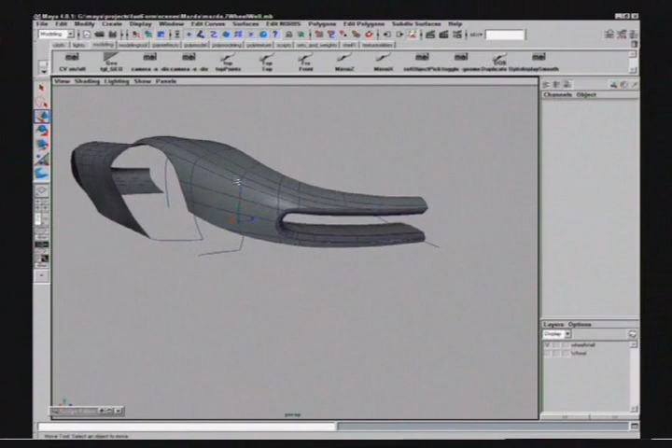Now to create the lower piece, I want it to be kind of a clone of this one. So what I'm going to do here is take this and either do something like duplicating that same surface, so I made a second copy of it, and then go in here and scale it a little bit wider and maybe a little bit longer.

I'm kind of over exaggerating it, but we have a double shell here where I've duplicated the second surface and just kind of pulled it out a little bit wider and a little bit longer. If we want to get a very accurate distance between these where scale doesn't always work, we can make an offset copy that keeps equal distance between this shell and the new one.

That is using the offset tool, where this is a surface, so we go into Edit NURBS, Offset Surface, and then if we look at the options here, you basically have an offset distance slider and then fit to the surface exactly or fit to the same number of CV points. So I'm just going to go in and hit apply on that.

And then this will give us a ballooned out surface that is exactly the same distance away from the original all the way around. So it's different than a scaled copy, it actually keeps equal distance, and we can change the distance through this distance slider value.

Okay, so we can go from, say, a negative value to a positive value and maybe type in how far we want to offset. Maybe it's like 0.1 or 0.15 centimeters away. And change the fit method so you can check that out, surface fit versus CV fit, using the same number of points. Sometimes it'll have to add more.

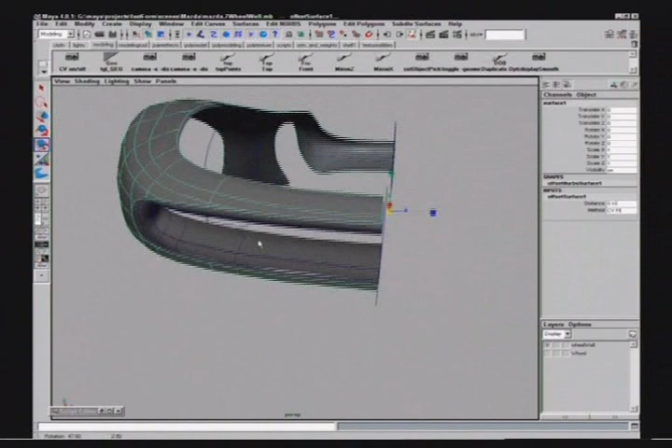In general, you're going to get the best results from offsetting outward. If you offset to the inside, you get this kind of twisting where the offset distance will start to wrap around itself, but going out will always make a nice surface. It kind of gets a little funky, so if you're ever going to use offset, try to offset to the outside or minimal inside offsetting.

Okay, so that gives me another surface there. Now what I'm going to do for this is untrim that surface, basically create the raw or starting point of my original surface, and then I need to come in here and trim it out again, only keeping these lower sections here.

So in my offset, say of 0.1, I can see that this curve is just a little bit too low. I actually need my curve on surface here to work with, but we can generate a new one either way. That was the curve that I projected on the interior body. What I'm going to do is duplicate this one and just move it down a little bit, to give me a little bit of ledge here between the original one and the second one. So that one I used to project the curve on the thinner surface.

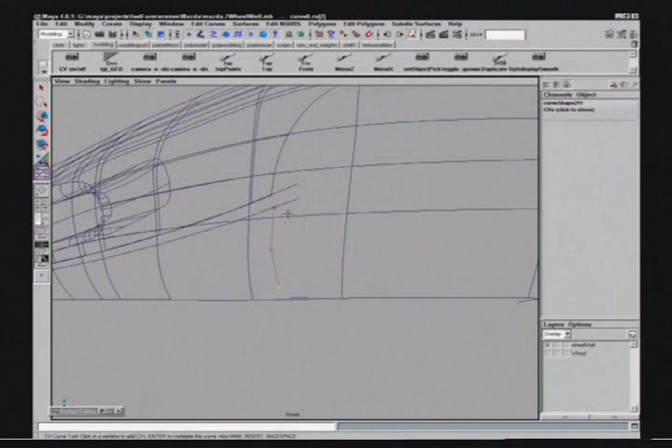This one is a little bit lower, and I'm going to project it on the fatter surface. So I have that curve, and then I'm also going to draw another curve coming off here, maybe snapping it near where our wheel well was, and then we could redesign this. Maybe this comes down a little bit straighter, or I use the existing curve that I had before when I projected my trim out. Either one will work for this.

So I have this curve and this surface. This is a large amount of surface area to deal with. Let's just project this on, so project curve on surface. And you can see this is what I created, this little trim from these two interior lines. This is our lower one, and then this is the other curve that I snapped down from the side here.

Now if I go in and trim this with my trim tool, I'm only going to keep just that section, and what we have is basically the same kind of duplicate of the other one with a little bit of step here because of our offset. And if you see, if we change the offset a little bit, we're moving that inside and out.

Now with a little bit of ledge here of transition, I just want to build a nice integrated little fillet in between here. So I'm going to use the freeform fillet again, and I'm going to go between this trim edge and the lower trim edge, and then institute the freeform fillet, which will do a nice smooth little blend transition between the upper and lower section here. If you look at this closely, you'll get a little S transition as the fillet's trying to be tangent to both ends here.

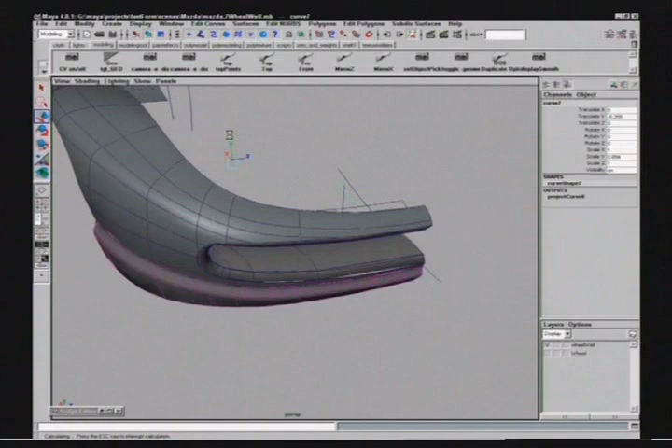Now, if we mess around with our construction history a little bit, I can move that original curve that I projected on the thinner piece down, and we'll give ourselves a little more fillet area. So I'm going to take that curve and start to lower it a little bit. What we're getting is more space for that fillet to do its work. If it's tighter, it'll end up with kind of a sharper ledge, and if we go too far, we'll go outside of our trim boundary, and then we can just give it a nice smooth little transition there. So that does a real subtle little change where this thing kind of bumps out. Neat little tool to add that kind of detail.

Same thing is going to happen back here, where back in my model I have this little ledge that's happening between the upper and lower piece. So if we select that piece right there, this has also been altered because I start to trim back in some other detail, but the initial point was to take another curve offset of this surface and then trim it out and make a lower section here.

So here's an example of what we can do for this piece. I have another copy of my model, this piece, that was basically another offset here, and I draw a series of trim curves or curves on surface. So we have a cross section going on through here and then a little circular opening here. What we're looking at now is just the untrimmed version of that, so you can see where I started with this particular piece. So this one can also be trimmed out, keeping basically the lower section and also that whole piece right there. Both of those are being trimmed.

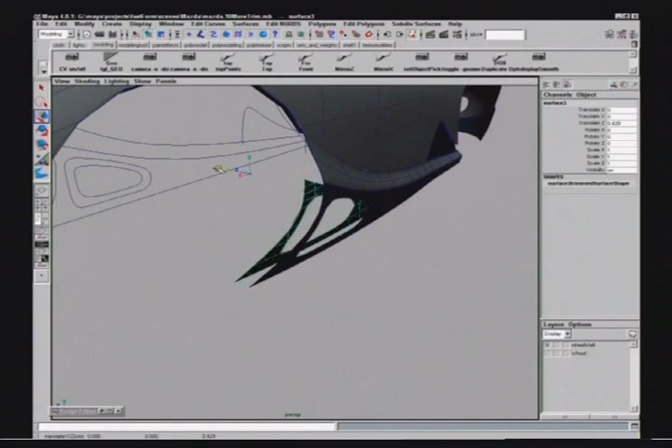Now if I take this copy and again do something like duplicate or offset it, let's make a copy of this and then just move it to the interior a little bit. Now I have a little bit more of an offset between these two, and if I try to do some kind of fillet between here, they're basically the same width in terms of the diameter around that circle, so that one's not going to work so well for this.

So if I untrim it again, basically set this up so that we can project more curves back on the surface. Let's move this to the exterior so we can look at it. And then I'm going to take a smaller version of the curve. So in my center line, you can see all the curves I kind of projected on here. There's one, and then there's a scaled down version of this.

Or you can achieve this by taking the fatter one and doing an offset curve. So go into edit curve, offset, and say offset curve. That can bring it to the interior or exterior. Say scale it down -0.25 and get something like that.

But offsetting to the interior is not always that good. You can see that you get some weird corners, and I'm even getting a little bit of funkiness right there. So this particular one, offsetting works better if you go out.

And in this one, I just scaled the curve down a little bit and reshaped it some. So if I have that curve, and again our other trimmed out surface, from my side view I'm going to project this curve onto the surface. So I have that one. The other curve that I projected, I really don't need this time. We'll go back and retrim this.

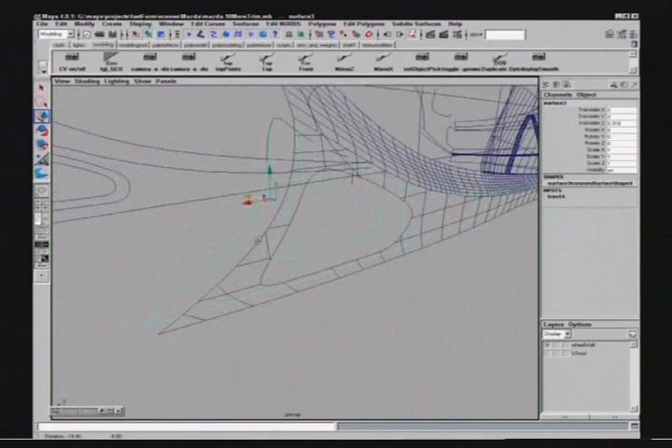In this case, we could try to do a freeform fillet between those two. So selecting my trim edge, and selecting that trim edge, and then go in and throw on your freeform fillet again, which will close off that section here. And that'll create that nice smooth little integration.

Now, once I do this, I don't need that other piece anymore. This really isn't serving any purpose, so you could just delete it. So I just get rid of that little interior piece, and then we have our smooth little integration. We could throw on something like a plane in the back if we wanted to, or actually do the entire trim out again, keeping just that small piece.

Now, trimming can be fairly heavy, and you can end up with a lot of surface. One way you can prevent trimming from producing major amounts of surface here is when you're trimming out a surface, use what's called shrink surface.

So if I untrim this surface, see how this is a much smaller section than the original body size that was really large. What trim with shrink does is it detaches a lot of the surface that you're not going to be needing for this.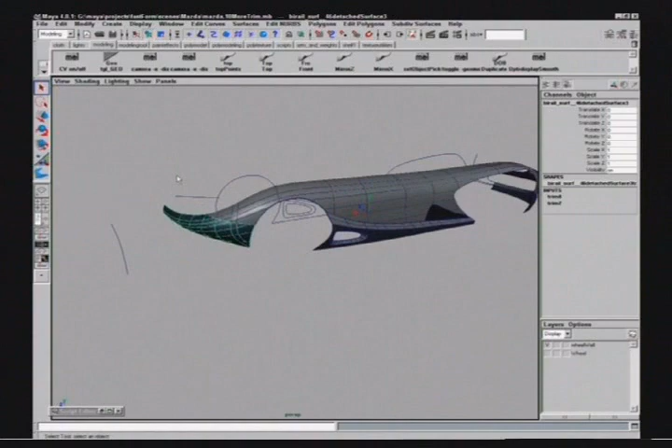For example, back here, I trimmed out by projecting a line back here where this kind of rear fender is. I projected out that piece, and if you look at the hulls, it really is a smaller piece of surface. If I went to my inputs for trimming when I did this, you'll see there's a thing that says shrink. If shrink is off, this surface was much larger.

Now you can see all the hulls that represent that surface. Let's just move this up for a second here. Actually, we're still projecting, so that's not going to look good. Let's bring it out to the side. And if I turn on the hulls, you can see that the entire surface still exists here.

But if I'm only using a very small part, what it's going to do is basically detach a little boundary here along that surface and use the smallest amount possible. So if I turn shrink on, it's only using a small part of the surface that it needs to have the original NURBS surface still fit inside that part of the model. So that's a good one for texture mapping too, because you're only trying to map a surface that's this big, say like UV or normal mapping, versus one that goes all the way around.

So I'll take that object and just put it back to where it was, back in position. And then the other part of detail that I added here is I just projected another curve, offset a copy of the interior section, and we did just a little loft between those two pieces.

So I had an inside shell and an outside shell, and just like the back piece here, I just threw it away afterwards. So we offset this, move it in, put that little loft between there, and then throw it away.

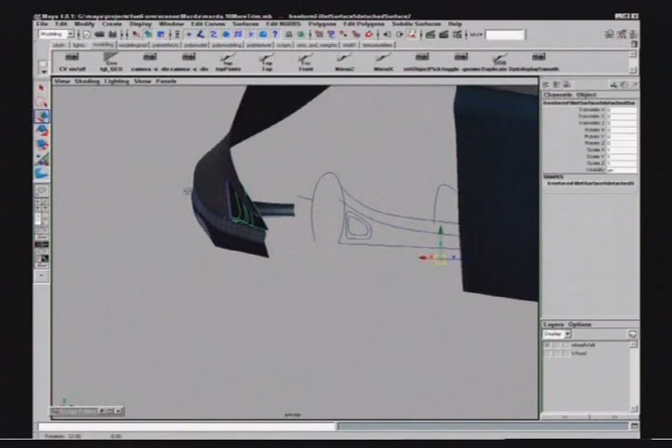And then the interior piece where the air intake is, I really just sculpted something at that point. Basically just taking a curve from here to here and duplicating and pulling it up, then reshaping this to add a little bit of air intake. It was more manual CV manipulation than anything. You could do it other ways as well.

Okay, for headlights, kind of the same thing. I took a curve from the side here and projected it right here onto the side, drawing a curve all the way through, and then building this piece or section afterwards. Now notice on this one that the CVs and alignment don't quite look the same as before, meaning they're not following a trimmed out isoparm section. This was actually a whole new surface.

When you're doing this, you can model it a couple of ways. One way is to take another copy of your model, duplicate it with Shift D. Then I go in and untrim it, come back and retrim it, just keeping that piece. Then we can basically slot that little piece back into our model. That's kind of like doing a trim divide where you're keeping both sections, you're just making this one a new one with a different shader and things like that you can throw on there. So that's one way to do it.

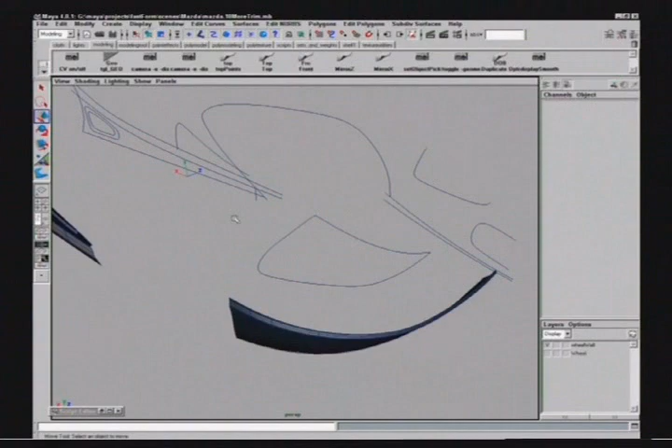The other way I did this is I duplicated the surface curve of the original surface, and then duplicated a surface curve off of this trim edge. So I end up with one curve here and one curve right here. If I hide this surface after duplicating, I extracted this form off here, which originally was one complete curve. What I did afterwards is went in and detached it right there and right here, making this into a 4-curve section. Then go in and do something like bi-rail.

So we'll use the bi-rail 2 tool, say bi-rail from that curve, so it'll let me pick it. Bi-rail 2, going from that curve to that one along that rail and that rail. And that can slot in a little piece. Or we could try bi-railing it the other way and see if that looks better. 1, 2, 3, 4, okay, and get another piece inside there. It's just building kind of heavy at this point.

Another way to do that is to try to square it. So we go into our square tool, pick 1, 2, 3, 4, and then come in here and square it, which could build a lighter section. And then bringing back the rest of the model, we can go in and do things like CV manipulation, and maybe rebuild this to lighten it up a little bit. So I rebuilt the square, and then grab some of the interior CVs.

And this is again more manual CV manipulation. Say I want to have a little bit raised headlight right there, so I'll just go in and pull this up a little bit, kind of add a little bit of a bump there for the headlight section. And that's what I did for that part.

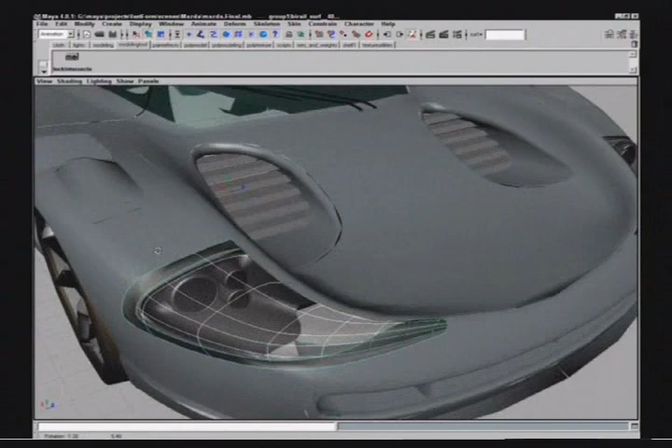And then the next thing, I trimmed out a little hole to get a little window kind of framing going on for the rest of that. So back on the other model here, this was our overall bi-rail, and then this piece was actually trimmed out of that. So there's two pieces going on here. This was all one original, and then it got trimmed out to make a smaller section, just so I could do a different shader assignment for that.

Okay, now for the window section, what I would take is a series of curves that I draw from the side view, 1, 2, 3, I have a couple of them inside here. If we hide the rest of the model and come into our side view panel, we didn't get all of it, so let's show last hidden, select that one, and hide selection. Now through this one, what I did was take a bunch of curves from the side view of how I want the front window to look, then the side window, and then basically the back window section coming back to right here. So a series of curves on how I want this trimmed out.

Now in the other model, this one was actually created so that the glass shell was on the exterior, and then the darker window frame, or the whole interior of the model, was on the inside. So this was the thinner model, with all the trimmed out black trim for the window section.

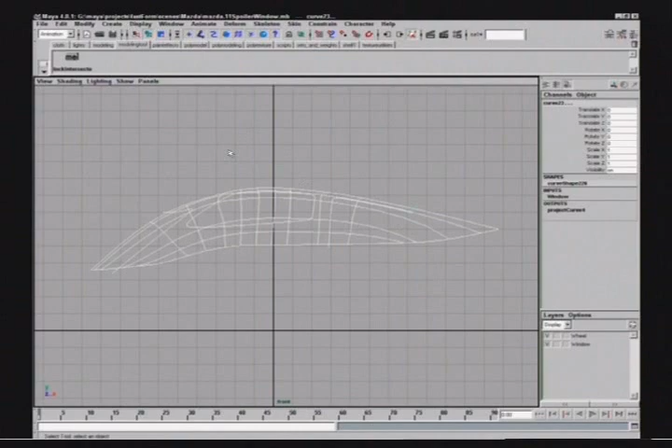Coming back to this, I would actually trim this out a couple times. So I'm going to take all these curves and surface and project the curve onto there. Project curve on surface, and make sure we have the right option. This was projecting from normal, so project curve on surface based on active view, this orthographic, and apply it.

And then we can see where all these little window cuts are. I make sure that when I'm drawing the curve, they go completely outside of the surface so we can get a complete closed off boundary here. So that'll be one of them.

And then we trim it. If I'm going to do the black shell on the inside, I'm going to pick on the area that is basically not where the windows are, so all this section inside here. So we have this piece.

And then we can throw on another shader. Say we want to make this part black, so I'll just throw on that kind of dark, shiny black shader on here. Let's use a little bit lighter color for now.

And then I want to duplicate that surface again. I'll make a duplicate, which if we transform this or just move it away for a second. Let's just move it up. And then I'm going to come in here and untrim it. So we have that piece.

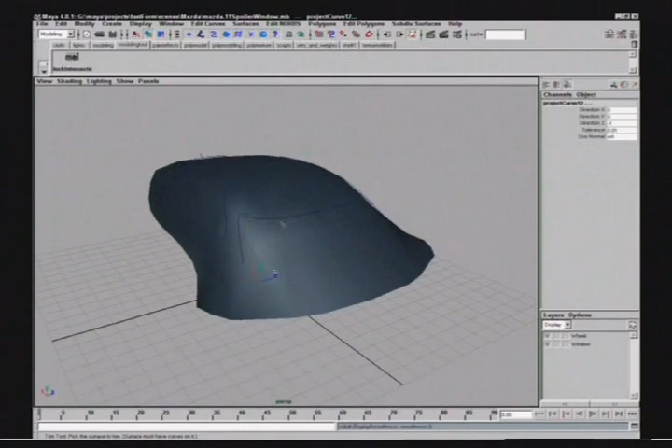So we can see that we moved it away, and then I'm going to take this other one and just hide it temporarily, move this one back down into position where it was, and then go and reapply all those curves again. Select all the curves and surface, project curve on surface, and this time trim out, keeping the window area. So we'll go back to trim and select the windows, all those, and then hit enter.

And it looks like one of those curves didn't go completely out, so we have to make sure we're doing that. Now the other model, I didn't actually go in and trim out those sections, I just kept the glass the way it was. So this one, not trimming, is probably not out all the way. Say we want to keep one of those windows, that kind of idea.

But in the previous version, this was actually just an entire glass shell over the rest of it. Now this back piece that isn't trimming out is just an issue that we probably didn't completely exit the surface prior to trimming. So you want to make sure that from the hulls of the original surface, which may have extended longer, those things go completely out, or you make sure that this part goes completely out in the intersection right there. That'll give you the entire pieces that you need for that puzzle, and then you reverse what you're trimming so you can keep everything together.

And then we have another section for the spoiler. This spoiler, if we look at the model here, and there's our finalized window. This was done through basically offsetting the midsection and also using a tool over here called bevel. This piece was actually a beveled out copy of the model where this little fin is sitting right here. And then the rest of this is just lofted.

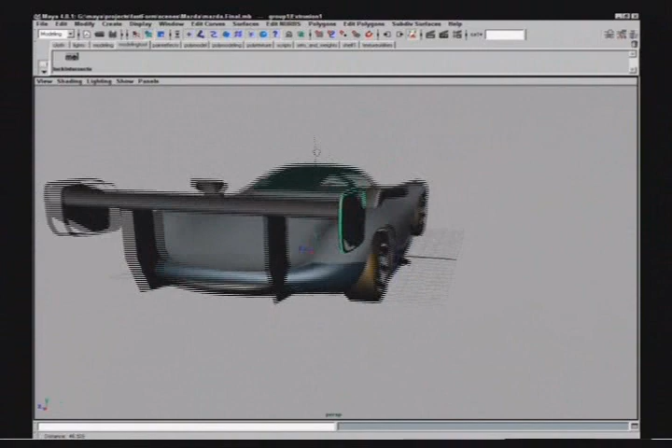So if we go over to the model, if I take a curve like this, say if this is the profile curve that I drew from the side, I'm going to go in and bevel this. So go down to surface and bevel, and this is going to create an extrusion as well as a bit of a beveled edge here. Right now this is just a straight line.

Now through the options of bevel, I'm going to change this such that the extrusion depth is going to be more narrow, and then the depth of the bevel and the width of the bevel are going to change. We can use a negative number here in the width, say like -2 or -0.2, to make that go the other way.

And then if I want to get a little more rounded edge, we can change the bevel corner from straight cut to curve in or curve out. Such as that, to get a little bit rounded section. In this case, I just did a straight cut here, and then decide how we want to scale that.

Sometimes after the bevel, you can just center the pivot in the middle of that and then do a regular scale, say non-proportionally scale that a little bit back, and then reposition this to where I want it to be for our little spoiler section.

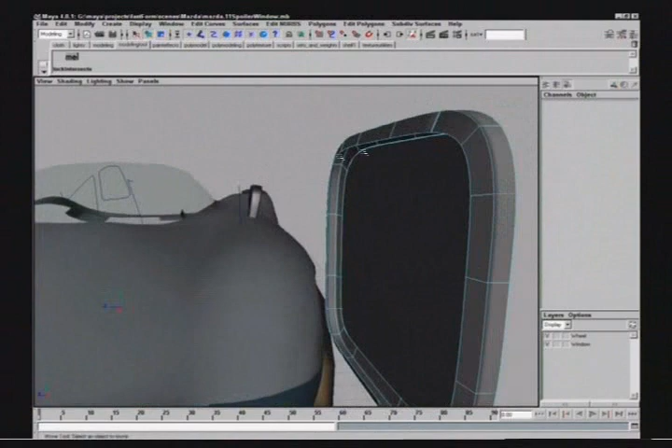And then to throw in the faces here of the bevel, just like if we're beveling text, I'm going to grab the isoparm right on the edge of that bevel and then go in and say planar. That'll throw a cap on there, and then do the same thing for the other half: isoparm, select that edge, and then go in and throw on a planar.

So all together, the bevel and the pieces, we can group them. So Control G to group, and then I'll go in and mirror that to the other side, along the z-axis, and we have our little spoiler section. In between here we'll take this curve and just kind of move it to the inside. That curve will be sitting there that we drew, and then duplicate it and just move it over to the other side.

For the other half there, and then if we want to create like fillets or some kind of cleaner integration, that can be done as well. So I'll take both those pieces and just loft them together for now, just to create our little spoiler section.

Now the back fins and things that I'm doing in here, you could also use the planar version of that, or you could also bevel that as well. And then for these little front vents, what I'm using is just simple polygon primitive cubes and scaling them down, or actually cylinders, scaling them down and then just positioning them inside the surface.

I'll show you just a quick little trick on that. What I do is build one of them here, and then hit Control D to duplicate with transform, and then go in and move that down a little bit.

To mimic kind of what I have on the other side, and move it forward a little bit, and then hit Control D consecutive times just to mimic the same move that we had before. So I'm just making one copy and then doing multiple copies based on the same transform. And that's a little different than this one - this was just transformed a little more, so you just undo it and then redo it.

Okay, so got most of that stuff pretty much covered. For this little air intake, that I used an extrude. So if we look back on our other model, it just extruded this by taking some kind of path curve and some kind of generation curve.

So this will be the path that I want to follow, and then a generation curve could be something like a quick circle. So let's just hide some of this other stuff here, get it out of the way, and then I'll go in and create a NURBS primitive circle, which I'm going to snap right onto the end here using curve snap, and then go in and scale this appropriately.

So if I want to make it a little bit more rounded, I'll grab some CVs here, such as that, and say I want to scale them in, and then grab those two and scale them in. And then take the whole group and scale it down.

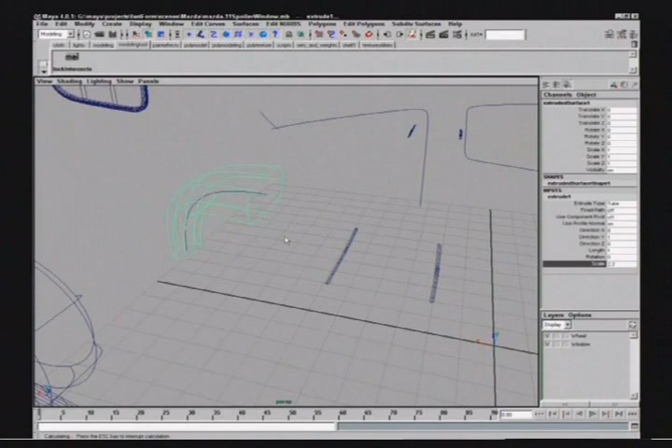To make that air intake a little wider, or go in and grab some CVs off the end here, right here, grab these couple rows of CVs and say let's just translate those even wider still. So I make this kind of flare out a little bit.

If I want to add just a quick little undercut, what I'll do is insert an isoparm right here, and throw in an extra isoparm right there at that selected location, then grab a hull, that thin one right at the middle, and start to scale that down a little bit. So this will kind of round out that air intake, and you could even insert another isoparm here.

So we'll do this again, then grab that hull, the thinnest one to the inside, and start to pull that back, and then this could be scaled down as well. So you can create quick little openings just through extrude, and then throw a few extra isoparms on to give you kind of a nice rounded little edge here. Something like that. As far as some of the rest of the detail...

So on here, these little caps that you're looking at, this little air intake lift, you do this by using a curve on surface as well, and kind of doing a quick little fillet. So a way you could do this is go in and take that surface, make it live by hitting the little magnet at the top here. Go in and create a new CV curve that just follows the form.

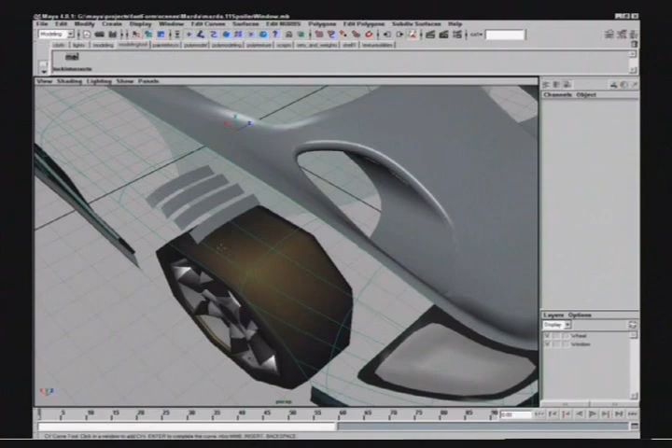Let's hide our wheel. Follow the form, kind of curve back around. So I'm making that as a live object. And then we're going to go in and select an edit point or a curve point right there in the middle of that curve and go in and detach it, so detach that curve into two separate pieces.

And again, this will be our curve on surface because that piece is live, so it allows us to draw the curve on there. And then we take these two and go in and throw on a freeform fillet, which will close off the section there. And then the last thing I do is just come in and pick on a few control vertices towards the middle here.

So I would grab those and just start pulling them up. So I can say, well, let's just pull this section up, and if we hit 3, we get a nice little scoop here, and then start jumping down to the next point on that surface. So go down, with your picking tools, the arrow keys, and pull this one down, another arrow key, pull this one down, and then pull that one down a little bit more. So that can create a quick little air opening, and it looks nice and tangent smooth to the surface.

And these I just took curves on surface, drew a curve on there, duplicated, pulled it off, and then just did a quick loft in between. And then we have the side vents going on there as well.

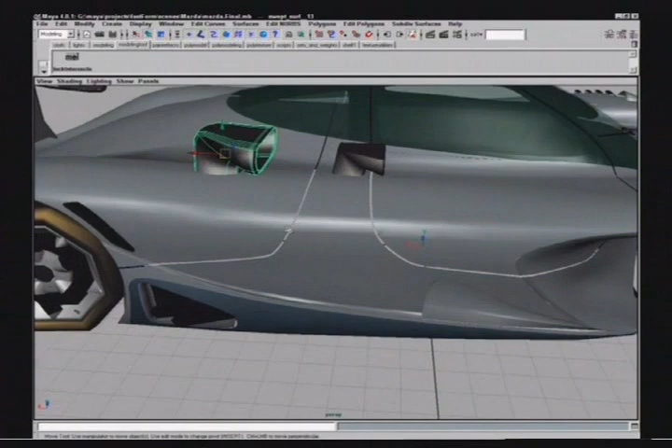And these are really, if you look at from the orthographic view of the model, just like we were doing with the window, we just draw a curve that descends all the way through the model and then comes back out here. In the end, once you get your curves on surface projected, you just need to join them together if you want to add like a little black line, or do something like a loft where you're just lofting between, say, this trim edge and then this trim edge.

So between those two pieces of the curve, you can give it a little bit of a dark line there. That'll get a little more tedious because you have to deal with every separate section of surface. So this section where we created a little fillet will be one trim edge coming across here, and then it's going to stop and you have to deal with the next one coming back around the other side. So each one of those pieces will need to be addressed there.

Okay, so that pretty much covers how to build the bulk of this. The rest of it is just adding little details like windshield wipers, antennas, and stuff like that. So that could give you a pretty good start, and you can go out and build a model just like this.